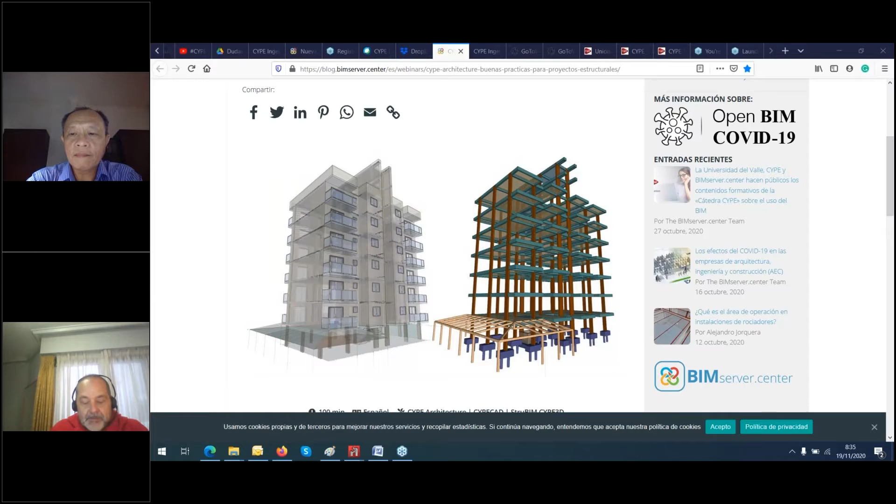And today, let me show you my screen. Good, thank you. Okay, today we are going to present the software CYPE 3D. And well, there are several programs connected with this software. So it's going to be a set of almost 3 software, but at the same time, I can explain to you step by step, slowly, about the program, how to learn the program.

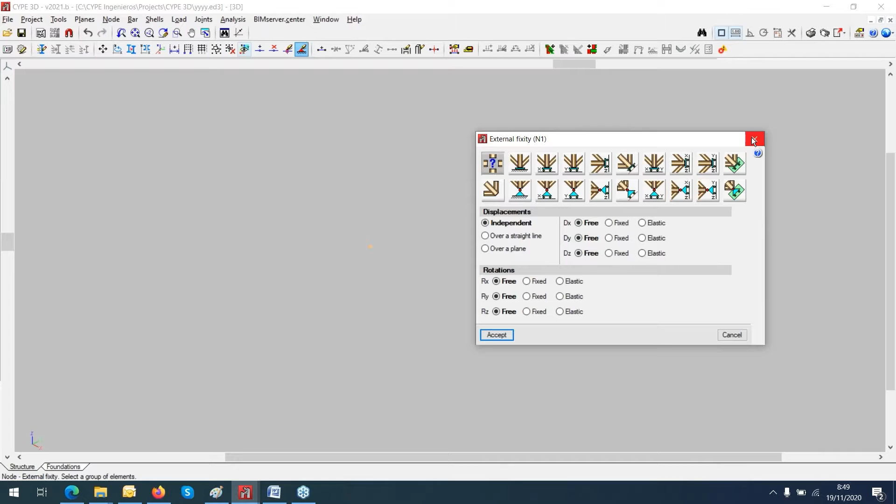So after that, you can start introducing a bar, a new one. By default, it gets this kind of bar. I'm going to show you how to choose the bars.

In this interface, we have several options regarding the materials. That one is the steel sections. The second one is the rolled steel plates, and the other one is the cold form steel. You can also work with wood, aluminum, special aluminum sections, concrete bars, or generic sections.

On the bottom, there are families. If you choose the first one, you have families on the bottom - could be this and this, etc. If you choose the second one, at the same time, you can display different sections. The same for the other ones.

So remember, if you choose, for example, to work with these special aluminum sections, once you finish the program, it will give you detailed result information according to the materials and so on.

If you are using the generic options and you want to introduce a concrete bar, these bars are not allowed to get reinforcement - you don't get the reinforcement. But if you are using the column or beam section selection, in that area you can get the reinforcements. That's why we introduced the first option about the elevation, because in that matter you have better control about the introduction of these elements.

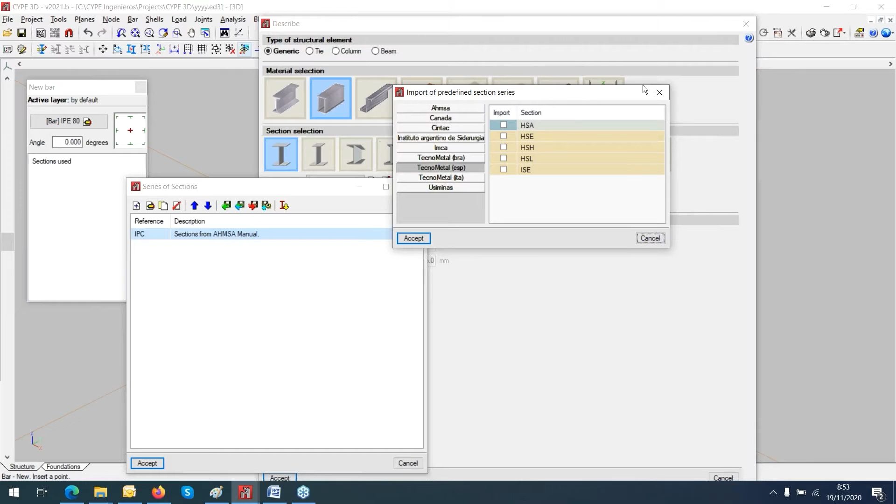Also, if locally you have some fabricators and you're interested to have this information in the software, you have to send us - you can call the company and ask for the profiles and manuals, etc., and send them to us, and we'll introduce it for the next software actualization.

All right, so I'm going to continue with this. Remember, the grid is like here, look, we have several options. Now you can use the American standard, you can use the American profiles, because perhaps you manage in your country that way. Okay, so I'm going to continue with that section, simple section.

Sorry, one second, let me see. Okay, good. Check the resistance. Well, I know something's wrong.

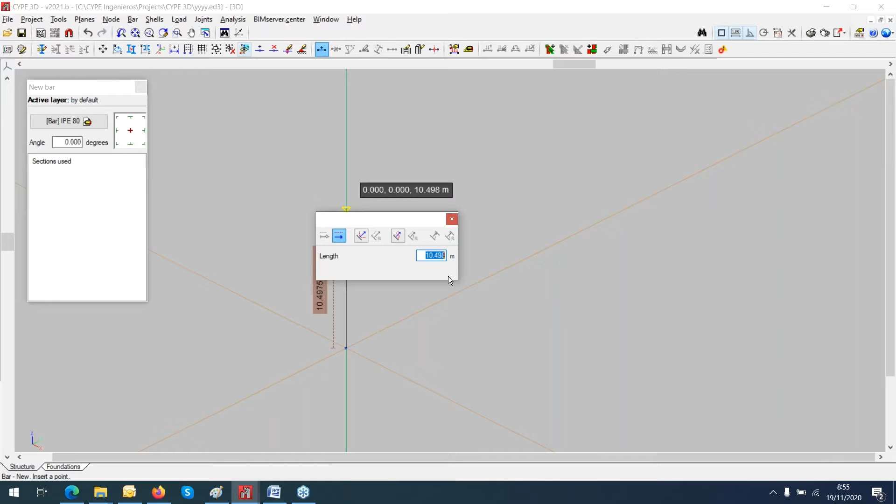Okay, so you can start from here. Remember this option, you can play with that, but you can go straight in the column using the orthogonal command. So you go straight, when you click anywhere you can introduce the height. This is the length - I'm going to do it 10, for example, and then you can go anywhere.

Sometimes, well, I prefer to work in 2D, but before going there, I will show you the basic stuff about the columns. Let me show you.

I already have these loads introduced for you. I'm going to show all of them. This is the basic knowledge about the software.

On top of the column, I'm introducing different load conditions. So we are going to see how we introduce the load first. We go for project, general data, and additional load cases. I introduce 5 live loads.

All of them are here. One's Q1, Q1 in the X direction, Q2 in the Y direction, Q3 is a moment, Q4 is a moment, and Q5 is a temperature.

There is one condition, and perhaps I'm going to use a new one, Q1. On the bottom you have different load dispositions, and this new disposition is like compatible. When you are playing chess, you have black and white. When you are using these options, it's like the loads are considered at one time with any combinations in the white sections. In another combination, they do the opposite, introducing the load in the black conditions, and so on.

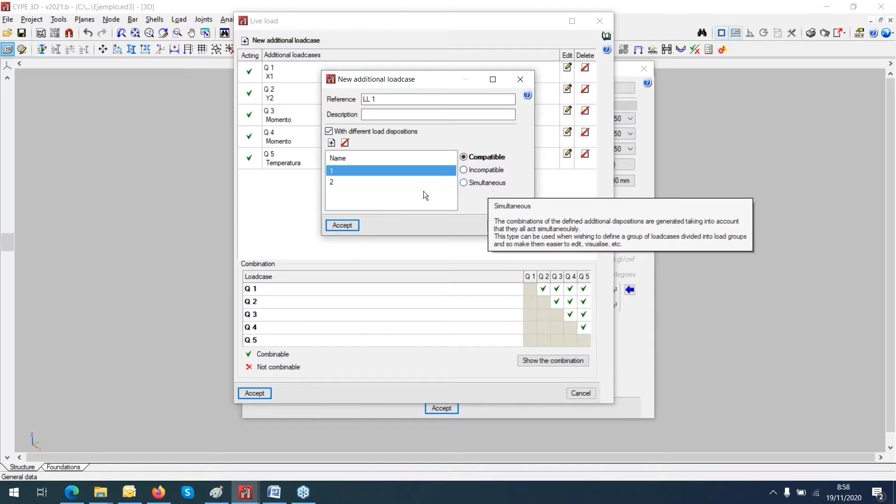And the other option is incompatible, and another is simultaneously. So, well, I'm going to cancel that. Remember, the more things you add here, the longer the program will take to do the analysis. Try to be precise, and that's all.

Okay, so we go for the conditions now, about the loads and the visibility. For example, I'm going to display not only multiple loads, just the Q1. This is the load Q1.

And now in the analysis - sorry, not this. Yeah, we can run the analysis. It's pretty simple. Now, whenever the analysis is done, I can look for the - well, first of all, I'm going to show you the conditions. Go for the Q1s.

For example, for the Q1, we go for the load conditions in the bar. So we go for this one, which is the Q4, I think so. Yeah, Q4. Q4 is a moment. The value is 4 ton meters.

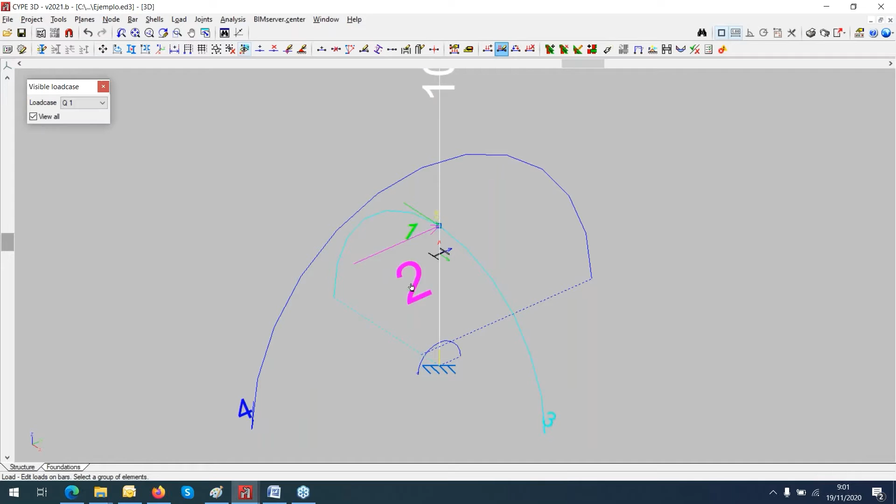But about this point, number 2, right click. The Q2 is a local point load. Relative position is about 3 meters. The global axis, I'm using this direction.

And what about the one - no, this one, let me see. That one is another point. Type of load is 1 ton. It's on top of the column, and the direction is going to be like this.

Okay, so once the analysis is done, I can go for, first of all, the check element. So if it's in green, it means that the profile that I chose is okay. This is the range that the profile is working in.

We do the first selection. I can go lower than 200. I'm using the HEB profile, but I can go lower than this one. And the ones that you are seeing on the screen in red color means it doesn't fulfill the requirements of the solicitation that we have in the bar.

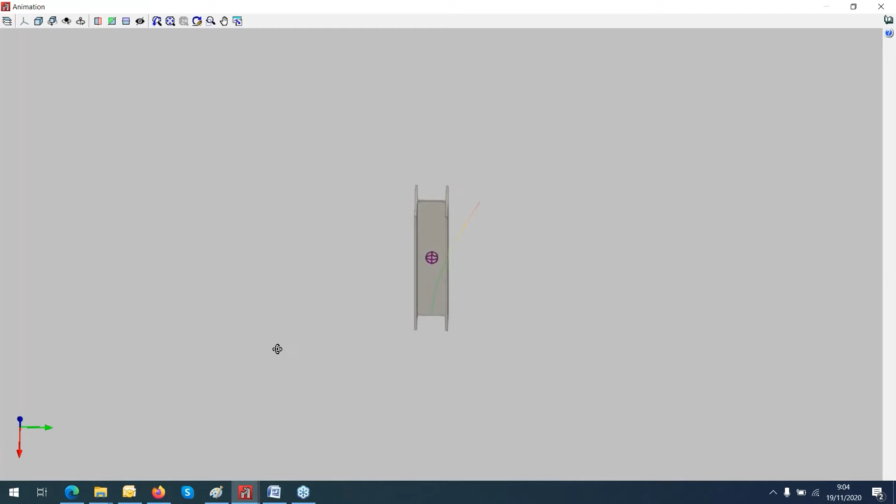So we go for Q1, Q2. Q2 is almost the same thing, almost the same. You can see it in this way, you can turn a little bit, it's another direction, so it's a very nice option to see what's going on with the structure.

That one doesn't do any effect because it's Q3, and then Q4, the same, and finally Q5, which is nothing. The temperature, which I chose, doesn't show any reaction.

You go back here through this window, in this small book over here. Click here, and you go back to the same screen. So now I'm going for another example, a very simple beam.

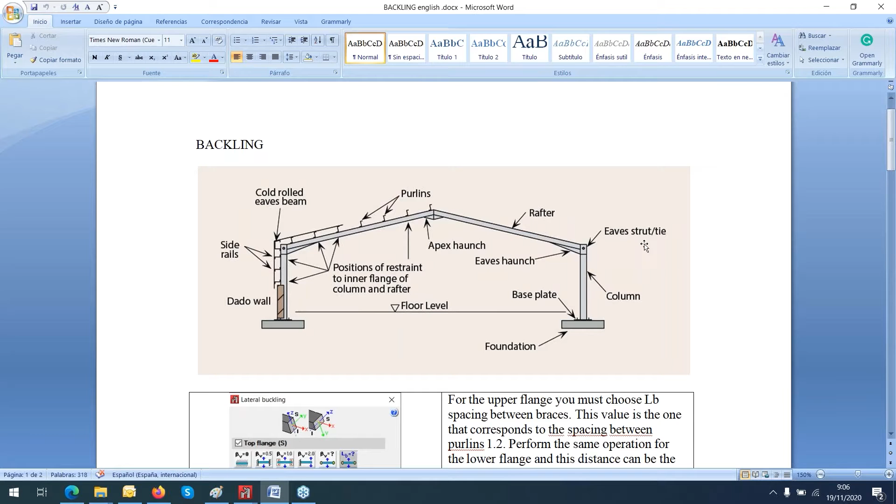One second. We're going to use purlins, and talk about the cold rolled beam. Around this side we have side rails, rafter. I'm going to change rafter for beams. Columns, I'm going to use columns. This kind of information you will get, but sometimes I'm going to use another one.

So okay, this beam, I do the same thing. I create some kind of loads, could be Q1, dead load, and self-weight. I'm going to do all of them, to view it.

So those loads create different reactions in that beam. What I mean is, for now on, we are going to talk about the reactions, or solicitations, and deformation, all the time, about the reaction in that beam.

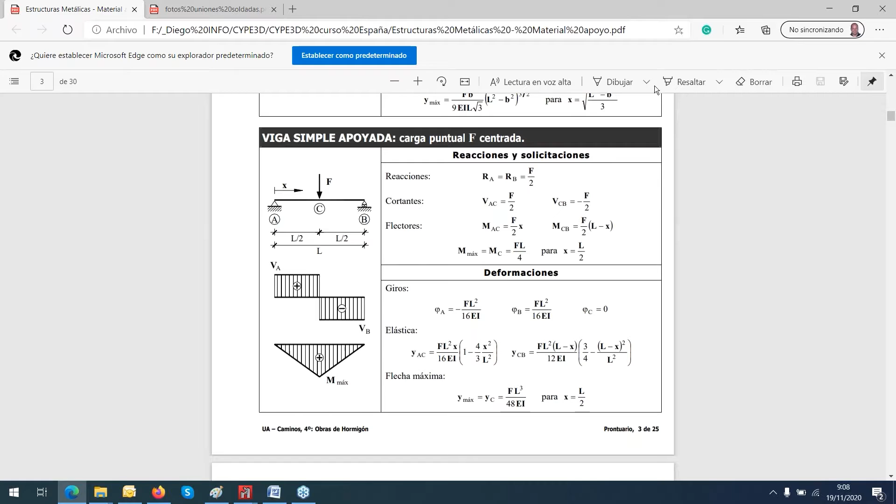Everybody knows about this kind of formulation, but I'm not going to talk about that. Just to show you about the reactions, we are going to have stress, moment, deflections, flectors, and the ones we want to have: rotation and elastic evaluations, moment deflection, maximum deflection. That's it for that, we're going to talk later about this.

Then the reactions that we are going to see in the analysis about this shape are going to be similar. So we go clear. According to that load, this beam is okay. We can go on with this, and the other extreme is going to be okay.

Remember the constraints, I'm going to show you the constraints. These are external ones, pin connections, and we have some restrictions about the displacement. Same for the other one. So at the end, we have that one free end.

This cantilever, the condition of the cantilever changed a little bit. I will show you first the analysis and the deformation shape. Okay, according to that...

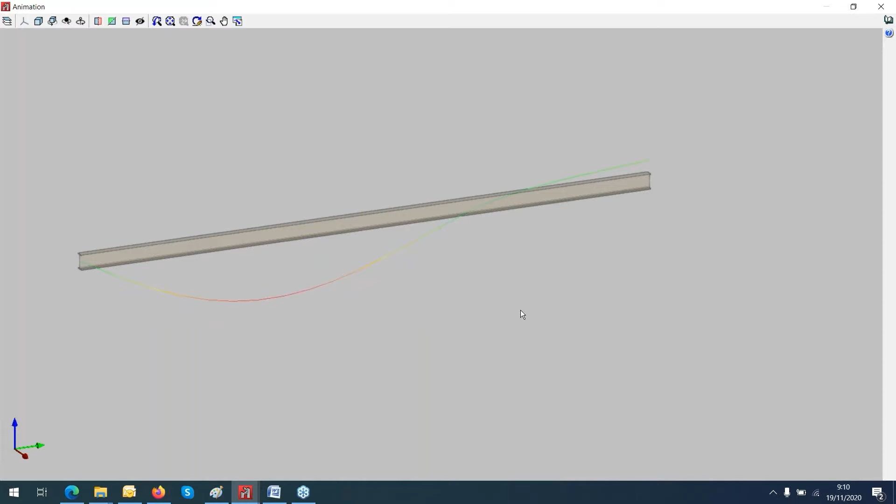Going to increase this value, maybe 300 or more, and for the dead load, look, that is what is happening, what's happening in the column, in the beam. Okay, this is the deformation shape.

Same thing for Q1. This is the normal behavior of that column or beam, but allow me to see in a better way the entire structure, how the structure is moving, and I will correct or fix something which is not well connected in the structure. So we go back to this case.

Now we are going to talk about the limit definitions, the deflections. I can create a deflection group, I have to select 2 points, and I already have this selection. But if I get a new one, the program will display something like that.

In this case, this is not the right way to do it for this scenario, because we have a cantilever on top on the right side. So in between the knots, between the articulations, we have something that we call secant, and at the end, from the second point to the free one, you will have something which is a tangent. So we have to be clear about these conditions.

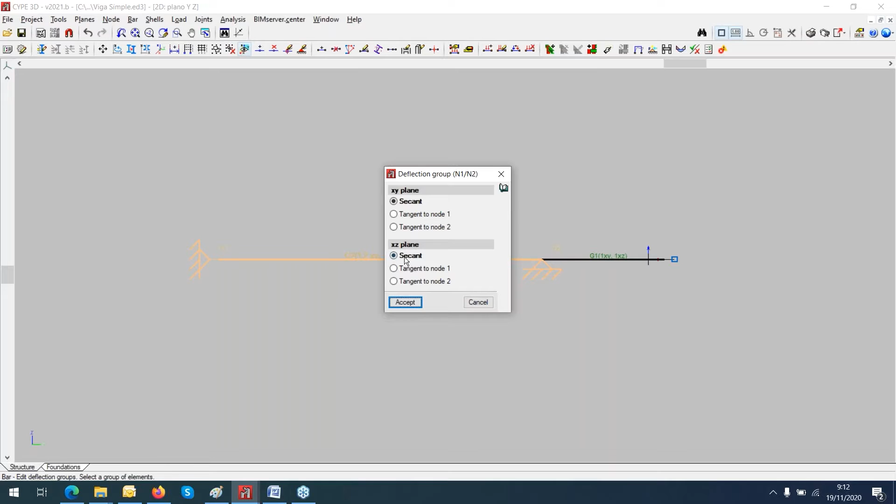I'm going to edit the group. This one is, as I told you, secant value in the X and Y plane, and in the X and Z plane are secant. It goes like this, something like that. And on the other side, the condition is tangent to knot one. But we have to have a reference from this side, because at the extreme of this bar, we have a free point.

So in order to select the tangent condition, we must have a point of reference. In this case, this point is the reference. That's why you call it N1 and N2. You don't see it right now because the color is different, but you will notice that we must change the conditions. In cantilever, it's different. Okay, this is knot N1 and knot number 2.

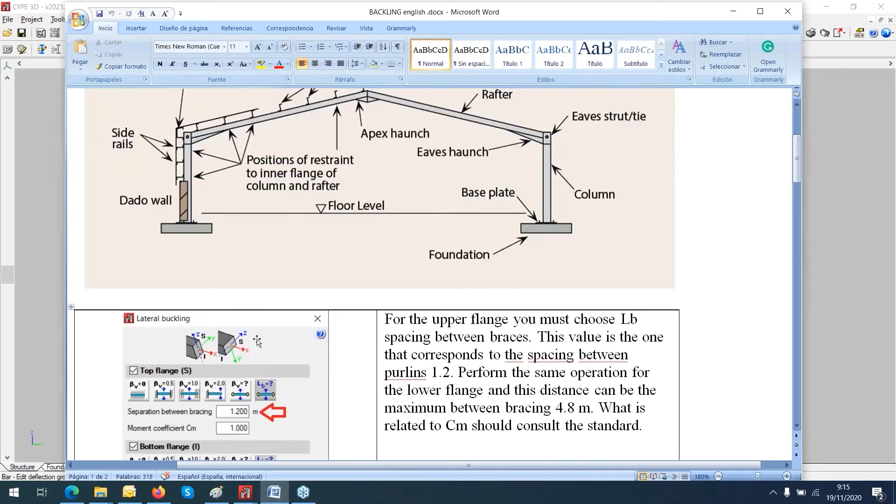According to the spacing between the straps, on top, the profile will be embedded or restricted, and in that area it is better to use on top the length of the spacing between straps. That's the right condition, because you are not going to have that buckling effect in that area. So on the bottom flange, you have to introduce the entire length of this rafter.

Suppose the rafter is 4.8 meters, so the second condition is going to be 4.8 meters. So that's all about this part. We have also several conditions, but we go on with the presentation. So continue with the lateral buckling. We go back to the selections depending on the conditions. In this case it will be something like this, like simply supported. If we go for the last one, especially on the roof of this warehouse.

Okay, and the cantilever is something similar. You have to choose the conditions. About the critical moment, I'm going to use, indeed,

allow me to do something. Let me check. Give me one moment, please. I had two screens, so I have to look for one of them. Let me see. Okay.

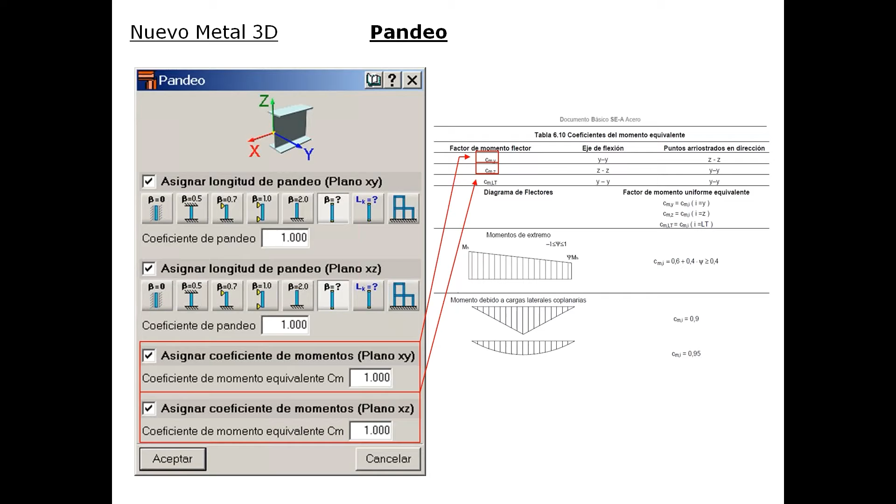Same thing for the lateral buckling. The way to do it in here is like this. The moment factors, Cm, are according to these tables. So don't worry about these factors. If you keep it 1, it's going to be safe. All right, so I think this is it for this part, and the analysis. I did the checks. Well, we can continue with the next examples.

Okay, so we go for our initial conditions, right? So I'm going to continue right now with how to work and how to introduce a warehouse in an easy way. We have several options. The ones I'm going to use are going to be easier. It's better to work with windows. I'm going to open one of them. In this case, it's going to be rectangular in that plane, orthogonal plane.

So I have to select first the vertical bar and then the side that I'm going to work. I'm going to use the Z Y plane. If you want to call it, I'm going to call it Z Y plane, or maybe frontal frame or whatever, right? So it's going to be my first one. So from now on, I'm going to continue in two screens. Let me check the bar. I'm going to continue in the menu bar.

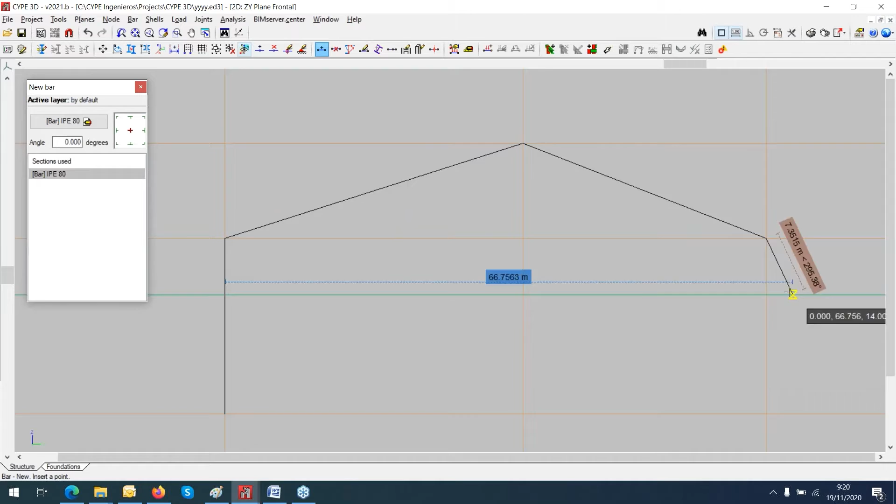So I don't really care where to click, I can do it like this. I'm gonna accept that as well. And also remember that I'm using the orthogonal commands. So I can display now everywhere. You can click everywhere. I accept that as okay. Sorry, it's okay. I'm going to go back. I did something wrong. And finally, I finish here.

Okay, so now we have a command, a very nice command, which is called tools. We go for tools, and then bar and node. We go for node. Then we go for codes. Okay, planes, dimensions.

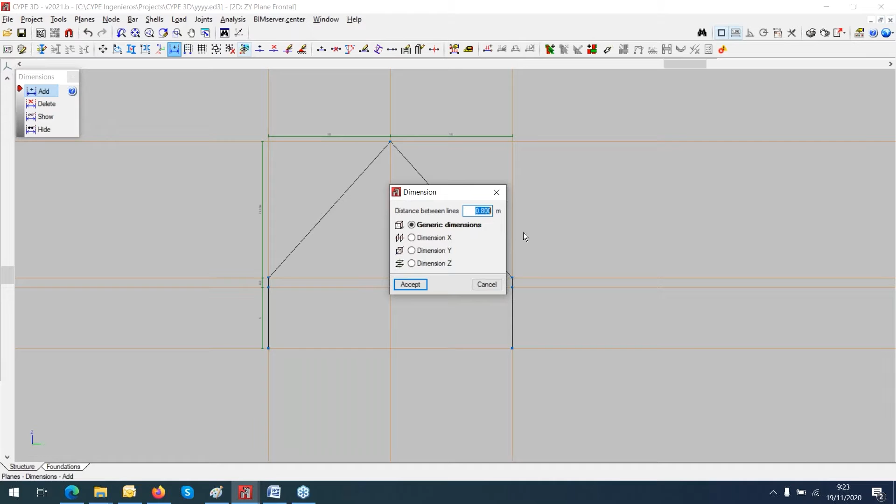Now I'm going to change that with the right click. You go back to the command. I'm going to introduce 5. 5 will be the distance between this and this. It is going to be the height of the warehouse, the first frame, and then right click 0.8, which is going to be from here to here, and the last one is going to be 1 meter. You can call here 1 meter and click on top, and then in the second one, now we get it right.

So these are the new conditions for my warehouse, and then I can start working on it. So I continue with the same bar, new one, from here up to here. Okay. And I need to use a different command right now, and this command we get through tools and generations and also planes. If you click from this point up to this point, you have, no, I'm sorry, generation: tools, generations, nodes and bars. I'm sorry, nodes and bar.

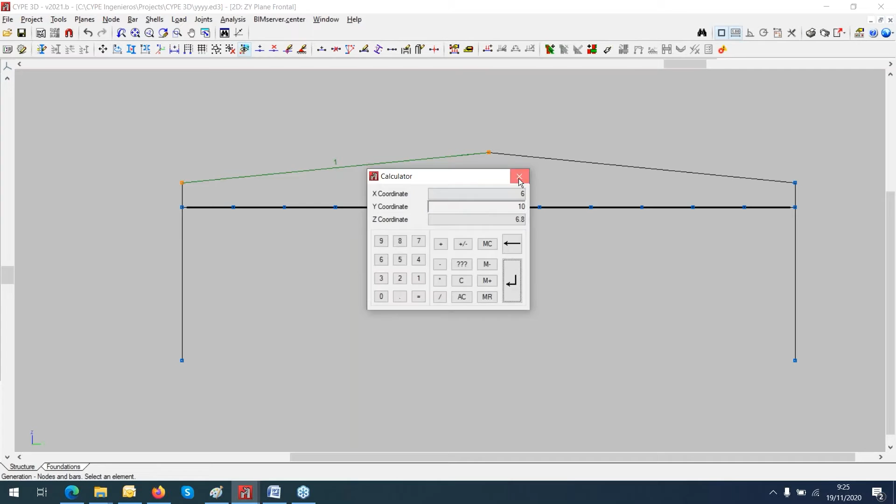Clicking the extreme and the other side, you will see number one. Click the right, click on the number. It gives the number of sections that you are going to use. In this particular case, I'm going to introduce 12 separations, and the program divides the bar in 12 sections. On top, right click. Yeah, now I'm going to introduce on top. On top is going to be something like 6. Sorry. We go back. I'm sorry. We go back to the same command.

I go for the tools, generations, nodes and bar. Click here on the other side, and then right, and the next number is gonna be 6. Like that. Continue with the same command to the extreme. Right click. It's number 6. All right. So we can continue with the same bar. By default, it displays IPE. So I'm going to go a little quickly. And then the other side.

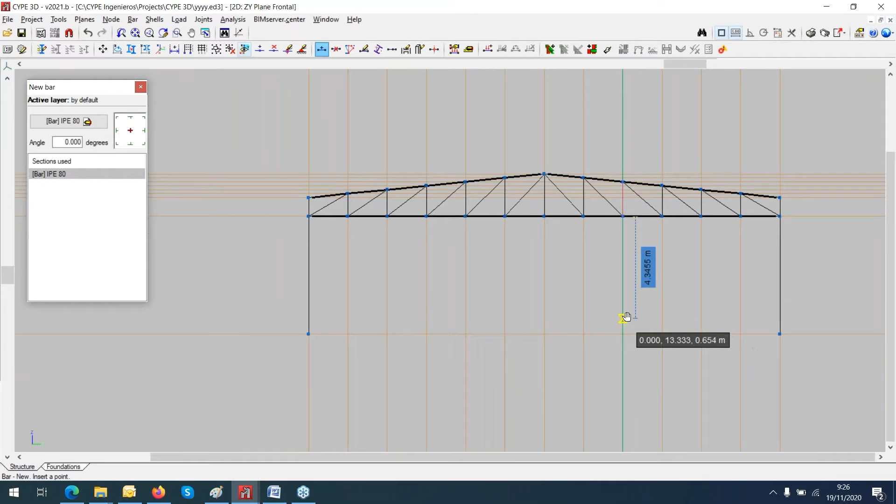You know, as we go on with the introduction, you will see different lines. Those lines are references. And if you go faster, maybe you get the wrong side because of that. So now, the next step is to use groups. In bars, we have to use group. I'm gonna group the one on top. Well, this one is gonna be different. I can select. Let me see. I can select like this. All this group.

Okay. Right click. Say yes. And now the one on the corner, because they are going to be different. And these two bars are going to work the same way. Okay. I forgot to select the external fixity on the bottom. I'm going to use the fixity. Okay.

On top, if I display that, look, internal fixity means the nodes, all nodes on top. If I display this with the right click, you can create different conditions. The ones you give some coefficients. This is free, and this one is a generic one. So we go for the first one, which is the fixed node. Okay, the program by default is going to use that.

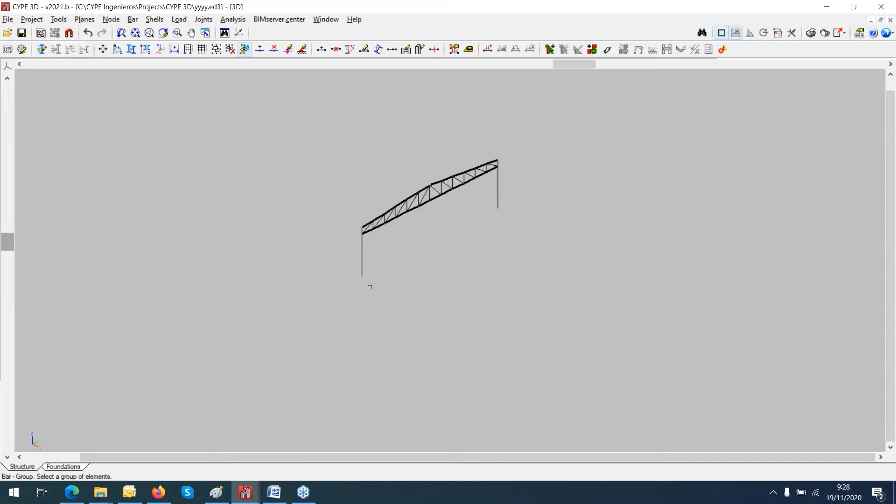So now if you go for group, if you touch it, you will display the groups. Okay. So now it's better to go back to the 3D view. Yeah, here from the 3D view, I'm going to generate the same frame at a certain distance. So you have two ways to do it. One way is to go back to the tools and use the copy commands. You're going to copy the nodes and bars.

You can select all of them like this, then click in one of the corners, right click, and then click it again, and you start moving the entire structure anywhere. Okay. If you want to be precise, use your orthogonality. You see, you control the displacement in a better way.

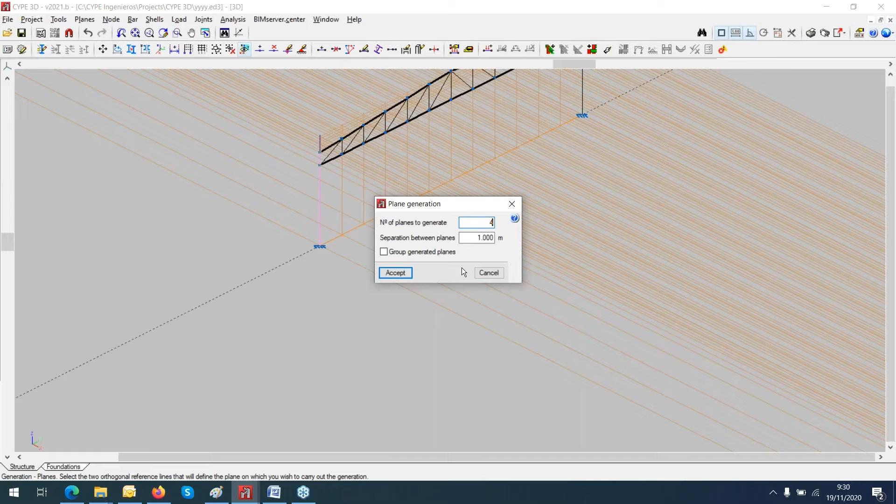Okay. Now we have another option, which we got in tools, and it's called generations and planes. Now we're going to use planes. So we click, for example, here. We click here. You have to be precise. You are clicking the wrong way. So now the number of planes to generate is going to be 4, and then the separation between them is going to be 5, and I'm not going to group them. Okay.

Oh my goodness, I did it wrong. 1 second. So I'm going to do this again. 4, and this one is going to be 5. Okay, good. Remember, you have to group them. So go for groups, always groups.

So this group, the front portico and the back portico, according to the load selections, are going to have the same results. So I prefer to select these two groups as one. These ones are going to be selected as well, and the internal ones are going to be different. Okay, so these and these and these are going to be another group. The ones on top are going to be another group.

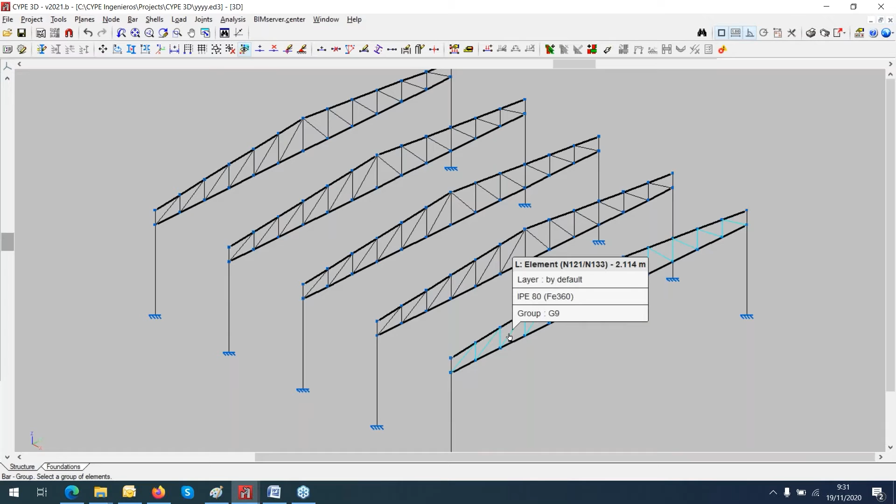What about this, that, another group? And sorry about this over here. Until we got it all, well, it's missing this one. Okay, so on the bottom, click, and the one on the bottom like this.

Maybe you're thinking why this guy is using groups. Groups are really important because suppose you have different loads on the roof. According to the location of the bars, some of them are going to require more solicitation. So as a group, the program is going to do the best selection according to the profiles that are available in the software. So that's the objective of using groups.

So we continue now with another window. We go for open a new window, the same thing, orthogonally. So we can select this point, this bar, and then the one on the bottom. Always give it a name. This is maybe the left side. Okay. We continue with the same bar. New bar.

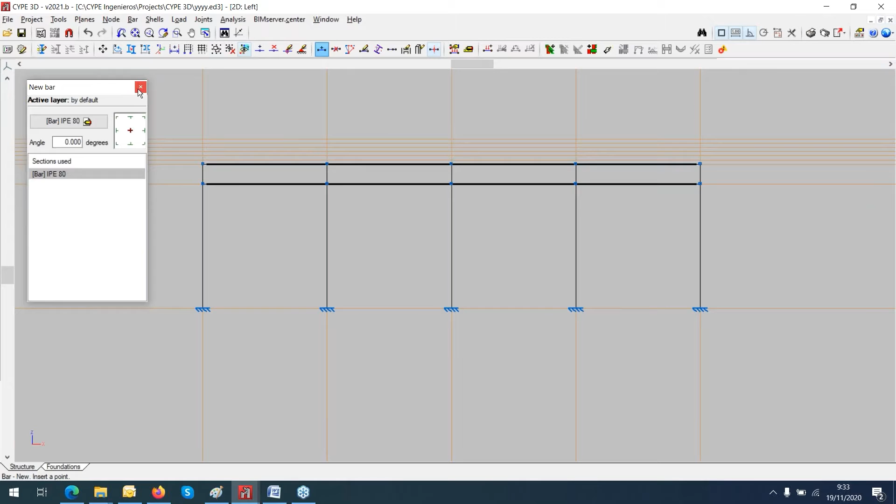So we go back to the tools commands, generations, and nodes and bars. I'm going to click here up to the end and right click, and it's going to be 16. Okay, on the bottom the same thing, 16. So now these are going to control the wind on that side.

What else? Here from the bottom, 3, just 3 nodes, and divide it in 3 spans. Okay, continue with the same bar. So wait, sorry, it's going to be like this. I'm going to make a close up from here. I'm going to navigate with the orthogonality. I already had that one.

I call this agility. Don't worry if you don't manage this the first time. If you do it 1, 2, 3 times, you will get it. I don't know if you know an expression. You say, if a fool persists in his foolishness, sometimes he becomes wise.

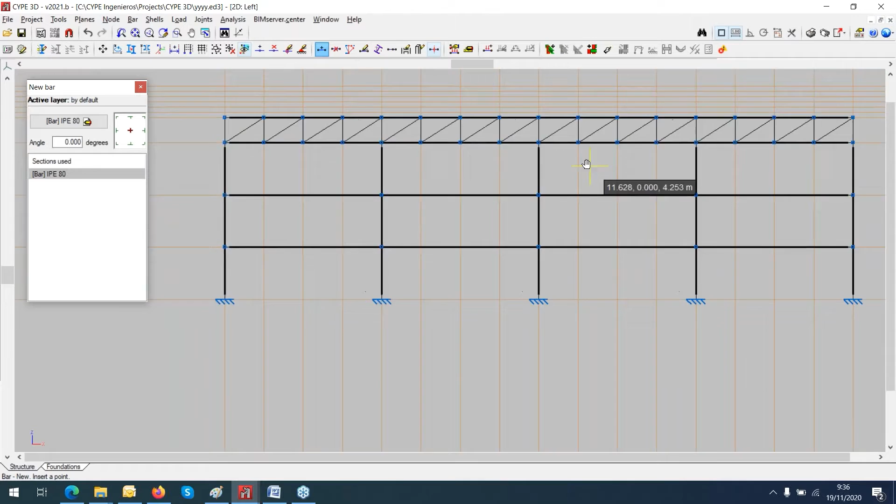All right. So another one from this side up to here. Same thing from the bottom. Okay. And I will select the groups. Remember the groups? So we go back for groups. I'm going to select, not the one at the corner, because I already had that one.

All right. So another group, the one on top. That's another group. The one in the corners already has a group. The one internally, we have a group. Those are in a group. The external in the group. So I'm going to do another one. Okay.

You will notice that there is a red color, dark color in between. That is because we are considering right now that the bar is a full bar. It was made that long from the factory. So using the bar, we can create an element. You must click in the first knot and the second consecutive knot. Say yes. You notice that it's like you have sections of that bar, the same bar. This is the right way to do it.

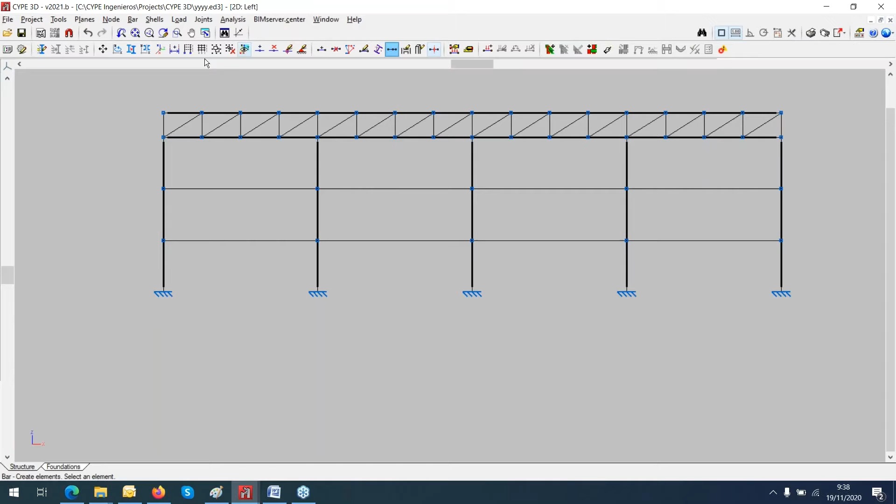All right. I'm not going to do it with the column because the columns are going to be like this. Then you can use different elements, you are going to reinforce in a different way using the different bar. We go for a new one. Okay, look at this one. I'm going to use the tie section, the tie bar, the round bar. We go for the 10 one. It doesn't really matter.

If you want to know more about the method that we are using here, you will display this document. It will tell you details about the method that we are using. This kind of bar is not allowed to work in compressed sections. It's always in tension analysis. So this is the method.

Accept that. Before starting to use this, I prefer to disable the generation of knots. I don't want to generate knots in between. So now I can go to the extremes, just to make sure that in the center I'm not going to get a knot, because this is not the right condition. But the program by itself creates a different bolt connection in here. The same for the extreme.

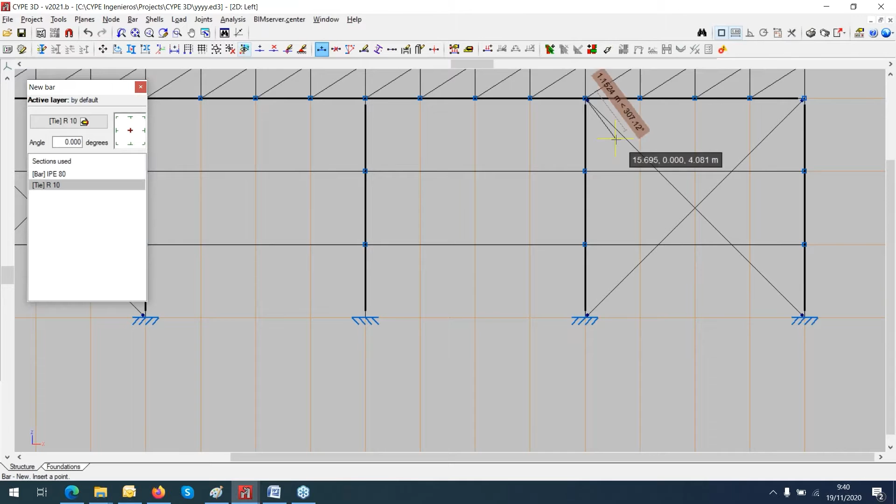Okay, so remember groups, always groups. I insist. Okay, yes. Once I divide the bar, it was unselected as a group. Okay, then it's done. So we go back to the 3D view now. And in this case, I'm going to move all these elements to the other side. So we are going to use another command, which is in planes. Groups in the plane XZ. All right, accept that.

So click here and then click one more time and then move to the other extreme. Click again, right click, say yes, and you got it. Okay. Now it's okay. Now I finished with this. I will display also the group just to make sure that it's working. Yeah, it's working. Okay. So now we go for the roof.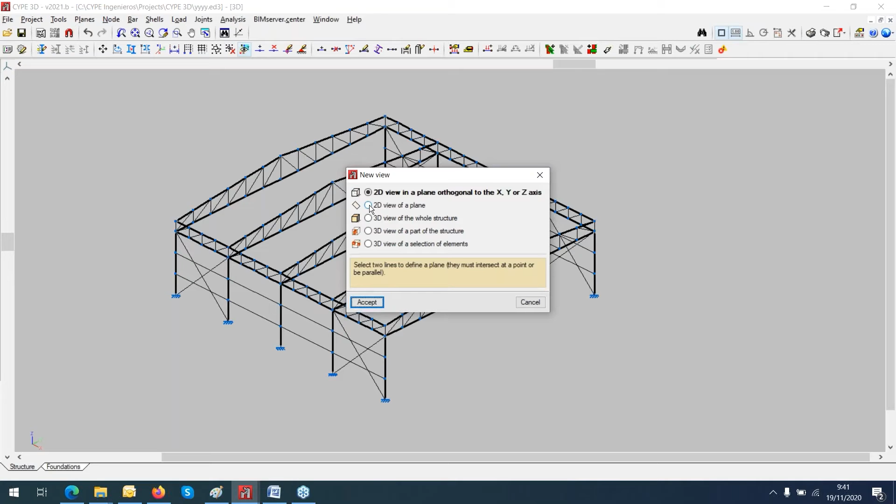Going for the roof, I must create another window. It's a new one. But in this case, you have a slope. You must go for the second choice. Well, sometimes it's better to get rid of this mess, the mesh. The way to do it is go back to node, planes. We call it show and hide planes. In this case, I'm going to hide them. Select all the points like this, right click, and it's gone.

Then we go for the windows, the 3D view, the 2D view. Select 3 points on top. Give a name. Could be, I don't know, left roof. Right. Same thing. We can continue with introducing the bars. Same bar. Well, we go for generate the knots. Don't forget that. See all of them. I'm doing the straps. Already know that the straps are going to be located on top.

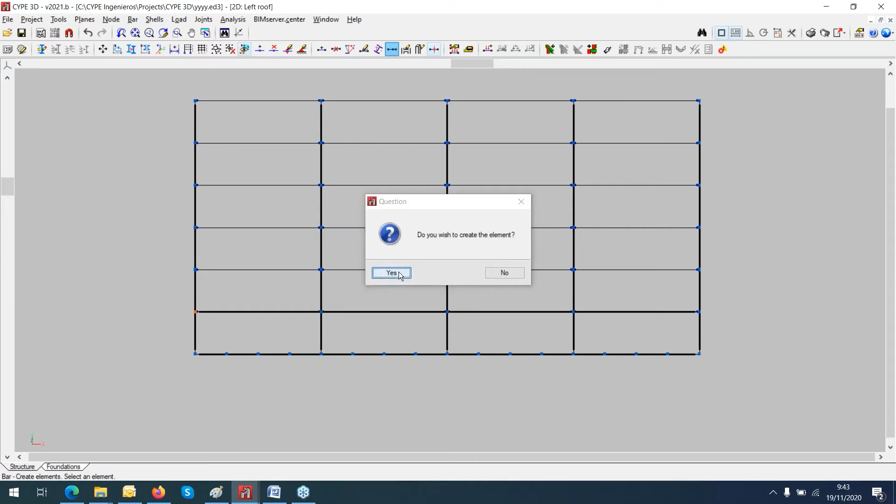And okay, that's okay. Now I can use the, sorry, create elements. Also create elements here. Two consecutive points. Right. Don't forget to use the group commands. The last one, I'm gonna keep it for a different group. I'll show you how. Like this, individually, right?

Now we go for the same selections. We continue with this one. You can come back here, or maybe you can use the bottom. If you click on the bottom, you have two selections: the IPE 80 and the 10 diameter. So remember to select the generated knot. So we go from here up to here.

All right, I'm doing okay. On the other side, the same thing. Okay, good. Group, remember? Group.

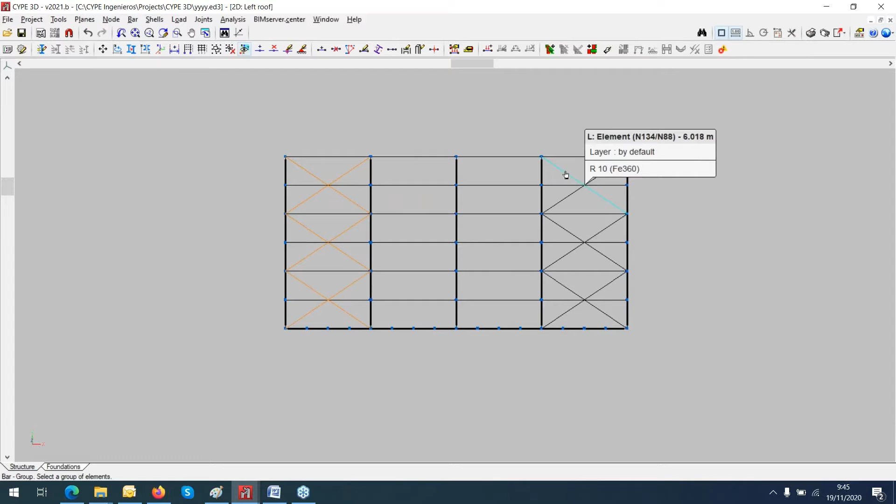Right side, yes. Okay, now we have to make sure that everything is going to be in the right place, where the straps are, for example. This view is called active view because it's only part of the structure. So we go for the active view, and

look, I made a mistake. I was introducing... Well, I have to change the bar. I'm going to describe this group, which is the wrong one. I'm going to use the IPE 80. Okay. Now you see, the 3D view helped you a lot. I was making some mistakes, but I'm using it, okay.

So now the straps have to be on top. And also the straps are not well located. They have a different slope. So I must correct that. In order to do so, we must go for the bar, which is called describe this position. So we go for the group, select the group. All right, right click.

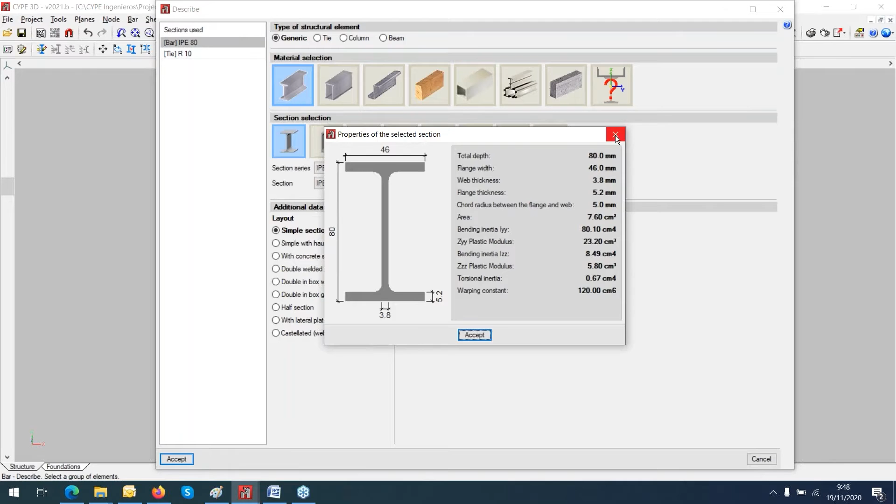And we go back to the 3D view in the active. So now it's missing a little more, it's almost in the middle. So I need to go a little farther. First of all, I need to know the right dimensions of that bar. Okay, here. So it's going to be 80. So half is going to be 40. So we go for the bar description, describe this position.

Right click. And now we go for the 40 millimeters, 40. Could be globally or locally. Okay, I'm using locally. If I click enter, the last check, look, that's the right position. The straps,

look, in this case, the purlins, or you call them straps, if you are using the portal frame generator, it gives you exactly the right purlins and also the best separation of these purlins. In my examples, I already had it, but the right way to do it is like this. Once you are inside 3D, it's up to you to introduce that one. If not, it's not important. You need to introduce it because you want to show the clients some details about the job, about the work, right? Okay, so continue with the other side.

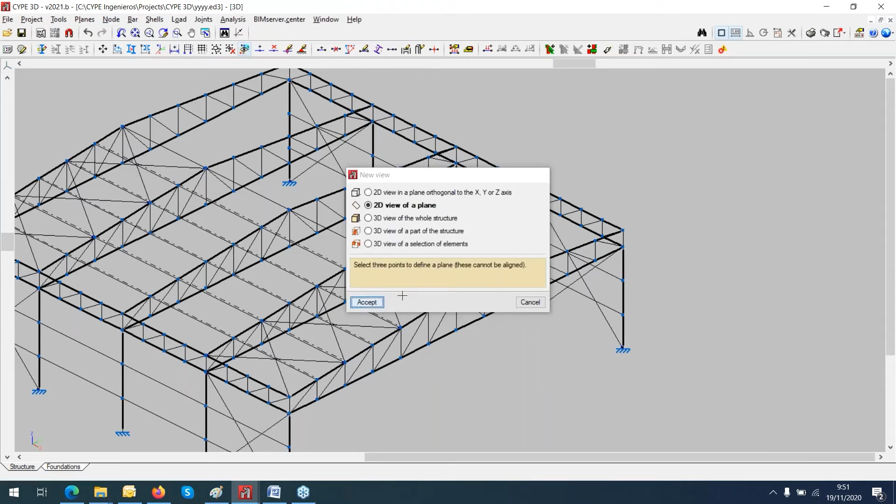We go for the 3D view. I'm going to introduce the last one, analysis of the window. Open a new one, select 3 points. Sorry, I did it wrong. I'm gonna cancel because I did it wrong. This is the right side, right roof. We do the same. 80.

Purlins are really hard to do right. It's gonna be a little difficult, but with this program, it's gonna be easier. A bar, create an element, 2 consecutive points. Can you just copy that one, Diego? To copy, well, on the left, right, direct. No, if I copy, it doesn't copy. Oh well, yeah, could be a solution. Okay, it's done.

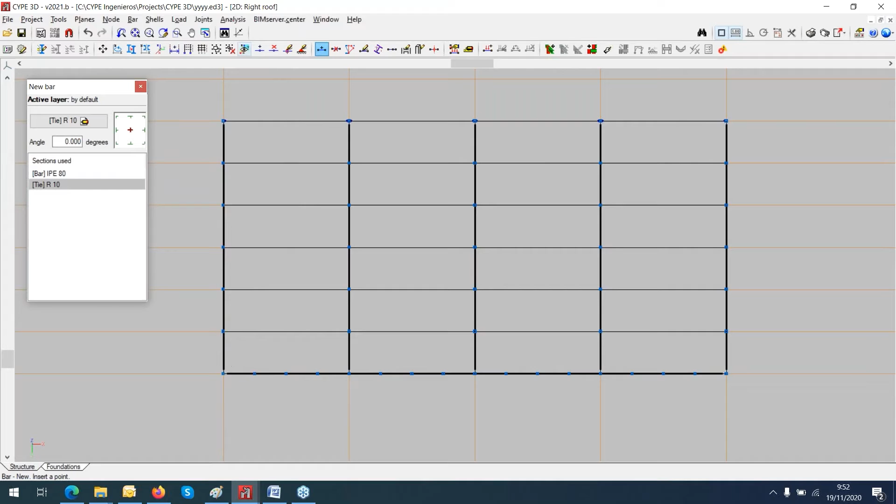Bar group. Okay. Okay. The last one. Remember, that's okay now. You see, the copy command would be a nice option as well. Everybody can find a better solution, better results. This is my option. This is one option.

To teach this software, you must concentrate and repeat the same actions all the time until people get it. It's gonna be boring sometimes, but that's the only way to learn. Practice makes you perfect, no?

Okay, good. The last check, I'm going to turn it: bars, describe the position. I already know the right position, so it's going to be faster. So we turn it, we put it on the bottom. It's going to be 40 millimeters. Oh no. In this case, it's going to be minus 40. We'll see. Trial and error. We have to check our job. Okay, good.

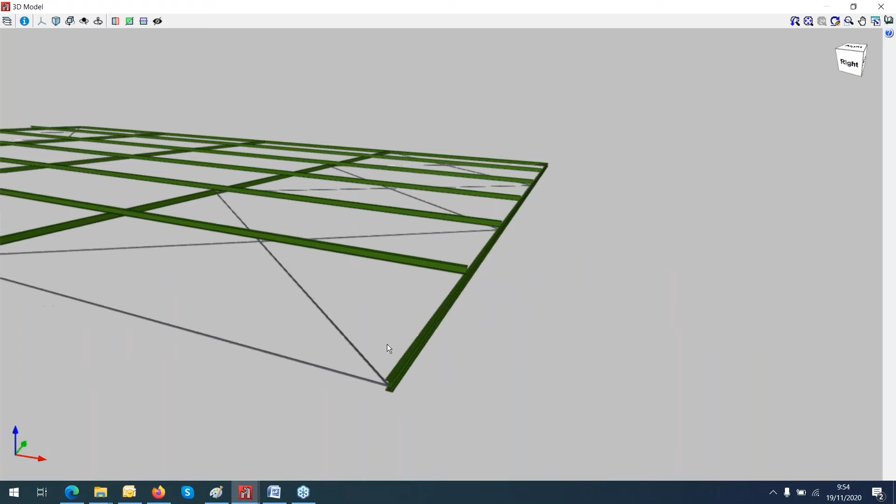There is something wrong here on top. I have to change that bar, the one on top, and I'm going to do it like this. Describe, and then right click. And I'm going to choose the IPE 80. One more time. Okay, good. I can put it on top as well. Okay.

Diego, yeah, tell me. Can we make the intersection on the very outermost of the bar with the purlins, not at the center, to lay it right at the end of the flange? Sure. Yeah, sure. You're right. Let me finish with this. Like this, and 40. I guess 40. Minus 40, I think so. Minus 40.

All right, it's okay. Well, perhaps it's not like this. It's okay, I need it straight because it's the last one.

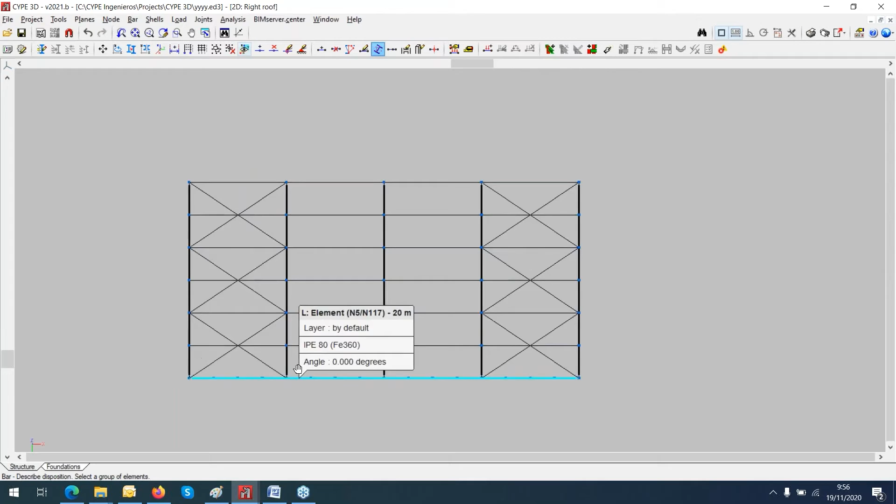Vale, okay, got it. Sorry, what are you saying? I forgot that, say again. The outer purlins, you know, when they meet at the outer bar, the outer bar has to be right at the edge. Now you are at the center.

Okay, yeah, that one, no? Yeah, this one. How to make it to the center and to the edge. Okay, but this is gonna be the same. Like this, the bar. Describe this position.

We can do it like this, for example. Try an arrow to turn this side. Go back to the active window.

Well, I did it the wrong side. We go back to the plane. Sorry, describe this position, so it's going to be on the other side.

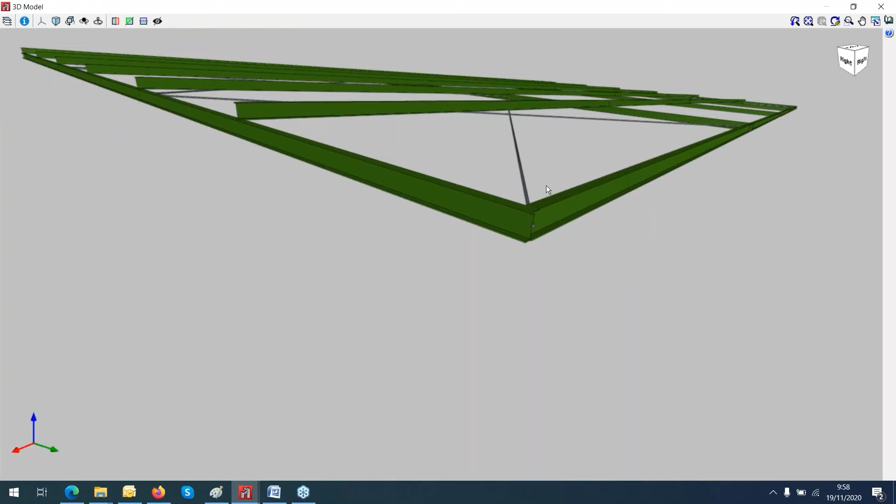Oops, sorry. Okay, good. Okay, now it's at the edge. Sorry, okay, you got it. It's at the edge. If you want to put it on top, just move it, okay? You can do it on top.

Let me see, let's try this position. Sorry, bar, let's try this position. On top, it's gonna be like this, and maybe 40, minus 40. I'm sorry, 40.

I get mixed up, you know. Minus 40. All right.

Okay, good, now it's in the right position. Then we go back to the 3D view. Now, up to now, we have to group again. This is the last one, we must select everything on top.

Now we have to check if everything is okay according to our selections. The group, see, group on top. Well, I can join this and this together.

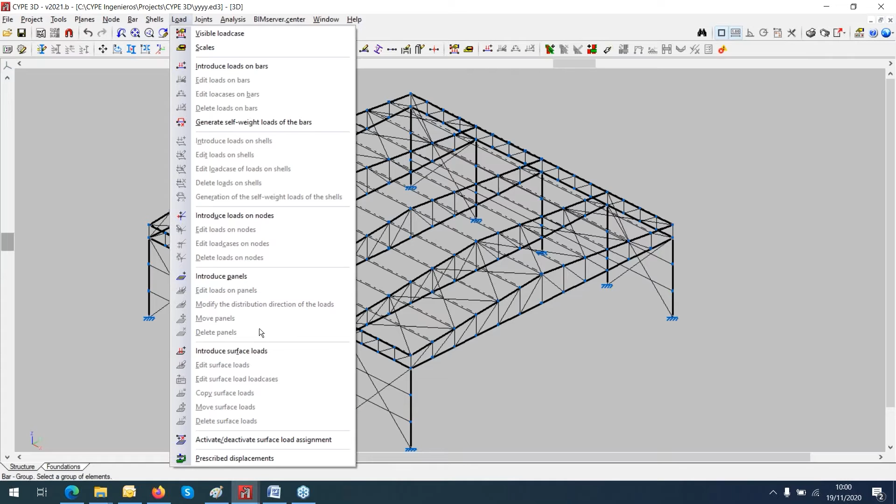The panel, you must go for 4 points. For example, I'm going to do it on top, 4 points. With the last point, right click, the program is going to select to finish the frame.

Then you must decide which bars are going to be loaded. So in my opinion, I'm going to select these sides. Right click, look, any loads coming from top are going

to be located in this direction. So the bars who are going to be loaded are going to be these ones, this one, that one, that one, that one, that one. This is my case, no?

This is my case. So from now on, I can introduce different kinds of loads. If in this case I only have the self weight, but I can do it as much as I want.

If I'm talking about the wind conditions, I will create my conditions. If I'm using the portal frame generator, this will be displayed by default. Everything will be free for you.

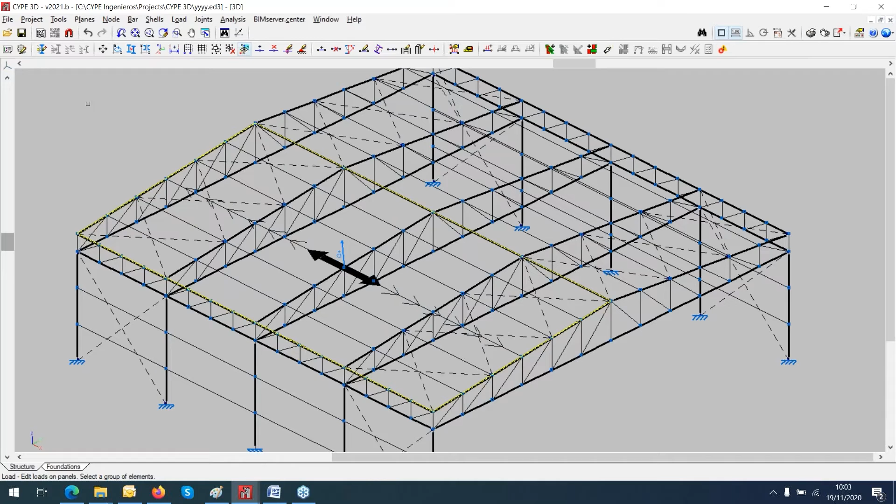There are also kinds of combinations that we must take into account. Introduce this. No, here, sorry, the limit state. The limit state.

Suppose the program by itself got inside the right combinations according to code selections. But if you want to do something external, maybe you are going to do some specific studies in the foundation, and you want to know something there, or maybe in the metallic structure.

So we go for configurations done by you, not in the concrete. It could be, for example, cold form steel. Go for default, this is the information that we got, you know.

But you need something specific, something important. So we go for the project options, click the blue arrow and accept it. You will have the combinations that are already done in the software, but it's up to you to study and select or create your own combinations.

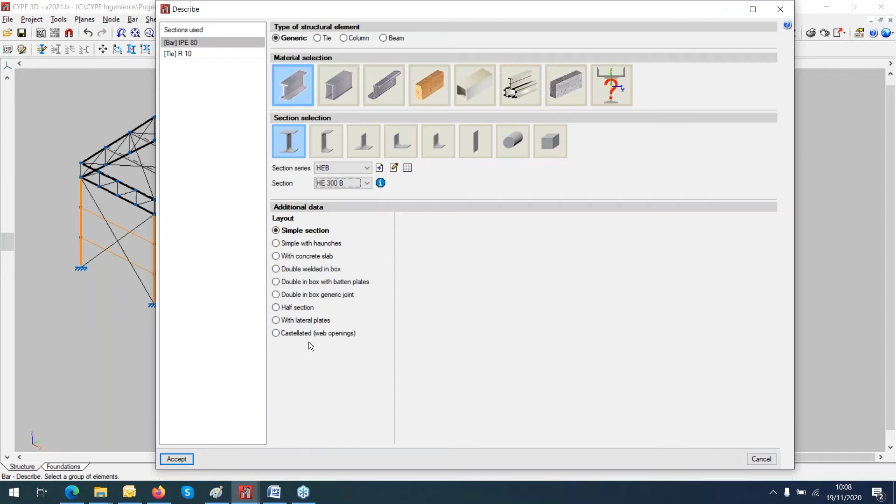So I'm going to display in 3D view the entire structure - you see, it's going to be something like that. But I use the first for the example - I introduce only one bar, maybe just 2 bars.

But you must understand that once you have the group and you finish the structure, then you can start introducing your profiles. You can start working with the profiles and then run the analysis, then start changing or making modifications until you get the best solution.

One of the best solutions means that you might know exactly about the buckling condition. Buckling and lateral buckling are essential - it's crucial for you to know how to use it, because if you need to save money in your construction, it's recommendable to use it properly, because you get the best profile. That's one thing.

Another thing - let me check if I have here. Okay, buckling is so interesting to know - you will have something like this. Maybe you have a strap here, you need some reinforcements in this size in the column. You have different kinds of mistakes that you may avoid if you don't do the proper solutions.

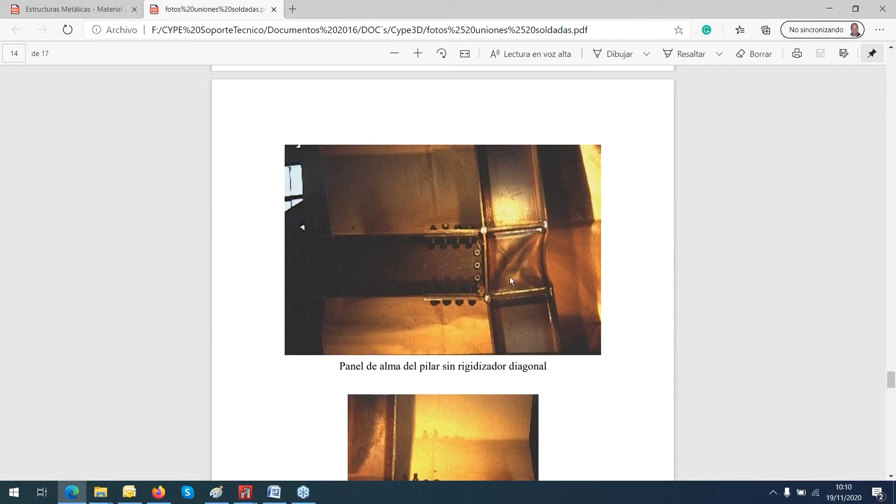You see, you have a lot of conditions. This one, the reinforcement here works okay for this beam but not for the column. Yeah, and they forgot to use here another restriction area. You see, there are several cases, several ones.

We must understand that in metallic structures, controlling the buckling is so essential. Well, they have different conditions. Some of these pictures I took here in Spain. Okay.

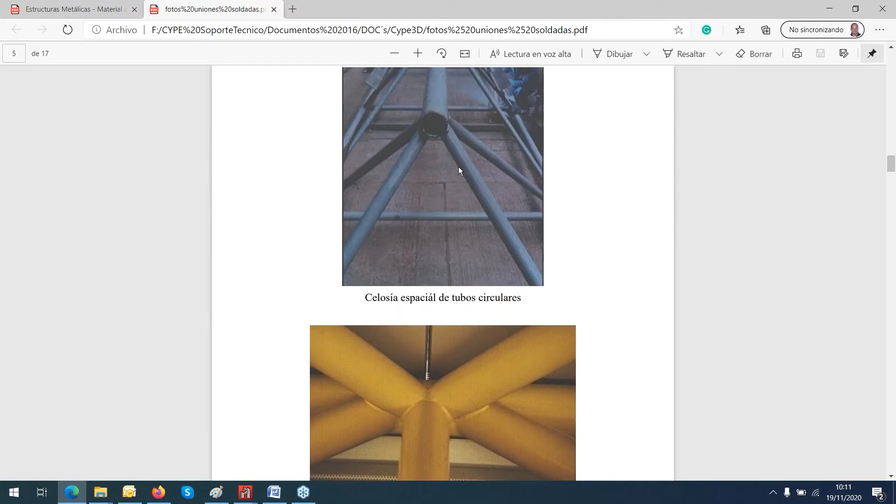We have this in the program - this solution, we have it in the program. So the program can provide all the detail of the connection, correct? Sure. Oh no, I will tell you later - we go back for that.

So now I'm going to display for you - I'm going to close this. I'm going to show you examples, because I want to make sure you understand the wind conditions, which are more important in metallic structure. I'm going to go for the aluminum. Where's our example? I think it's this one.

Okay, good. Look, in this loading, first of all I need to go for the project - here we have the additional load cases. When we are talking about wind, for this example we have 5 conditions. We have 2 in condition A - A positive and A negative, B positive and B negative - one in the front, and perhaps one for snow. But at least in this condition, wind conditions, we have 5.

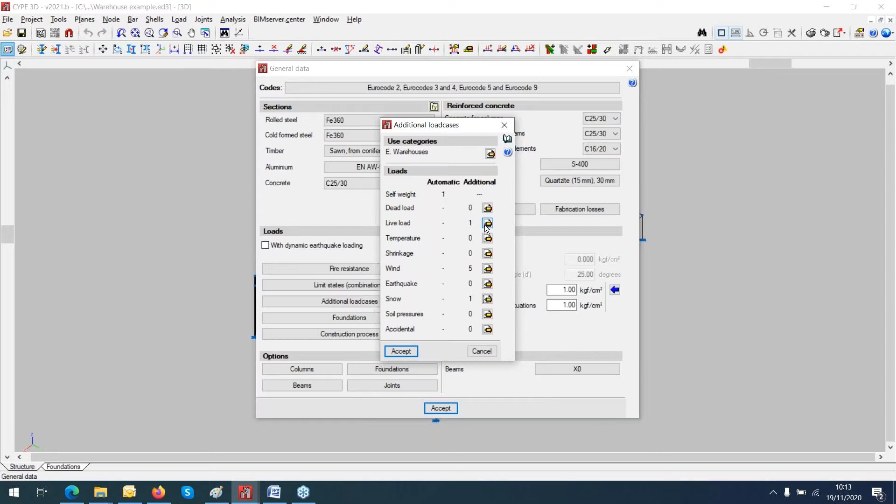Could be the snow. No, here the snow is like this one. The snow is this one. Live load could be for reparation or fixing problems on top of the roof. But these are the conditions.

Now I'm going to show you one by one. The load case conditions in CYPE 3D are not automatic. If you use the general frame generator that I'm going to use now, later the wind conditions are automatic. So we go first for the negative one. The negative one is like this.

The user did it manually. There is something wrong in this one. Maybe it's particular, maybe it's concrete. Now I'll show you the next one: positive one.

Different colors to distinguish between one another, and also the direction, you will notice here. It's coming from left to right.

Even inside the structure, the air goes differently and affects the structure differently. If the wind is coming this way, for sure it will affect differently this side of the roof or the other one.

We go now for the snow one, which is the easy one. This is the snow condition and the front condition, visible. The front one. You see, it's different.

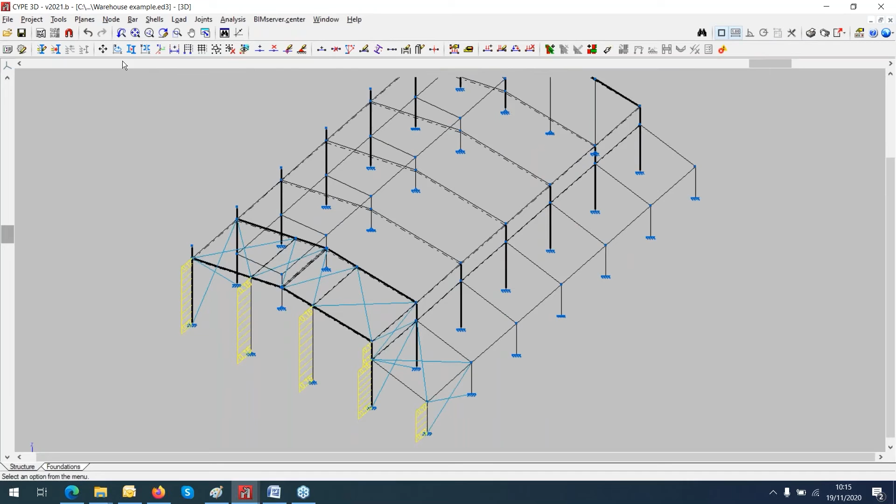Now, another thing: if you want to run the dynamic force, you must check the connections. Everything around the structure has to be well connected. Could be this section, this selection, for example, the bar, the node, the external fixity. This condition has to be in all the bars around the warehouse.

In this case, we have a different condition here. Look, so I must change this condition to the fixed one, because in the analysis the program will warn you that we have a mechanism, meaning that at that point you are liberated in the 3 degrees of freedom, and the program will not solve the structure. Inside the structure you can have that condition, but externally, like a frame, it has to be fixed. So you were talking about the joints.

So I'm going to do the analysis of this building, this warehouse. Sorry, won't be long, this is a very small chart. Remember, the analysis is done. I'm not going to go for the check and forces.

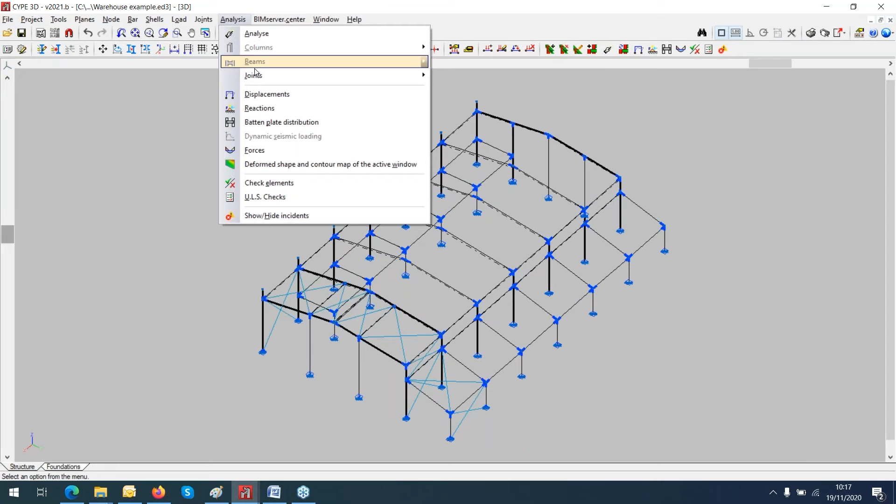We go for the joints. We are going to generate the joints. So the program recognized 180 connections. So they are there in blue. And now we go for the analysis and design of all of them.

Well, you can do welded connections or bolted connections. Now we go for bolted, but before that, at the bottom you have available the source of these libraries. I'm going to display the first one. They just go straight to our website. In our website you can go down.

You will see the connection that we already have. Be sure, or make sure, that the conditions are the same as you are recreating in the warehouse. So the solution here is a drawing. You can see it is a match with the structure.

For sure you will have the solution. Sometimes part of the node will be welded, another one could be bolted or welded. It's not necessary to have the same condition everywhere. So the joint is going to be like this.

Also in columns you have several steps in the structure. If you want to solve this particular joint, the top of the column has to be considered as... forgot the name, let me check... a continuous beam supported by columns. This connection has to be different. I will show you, okay, I will show you later.

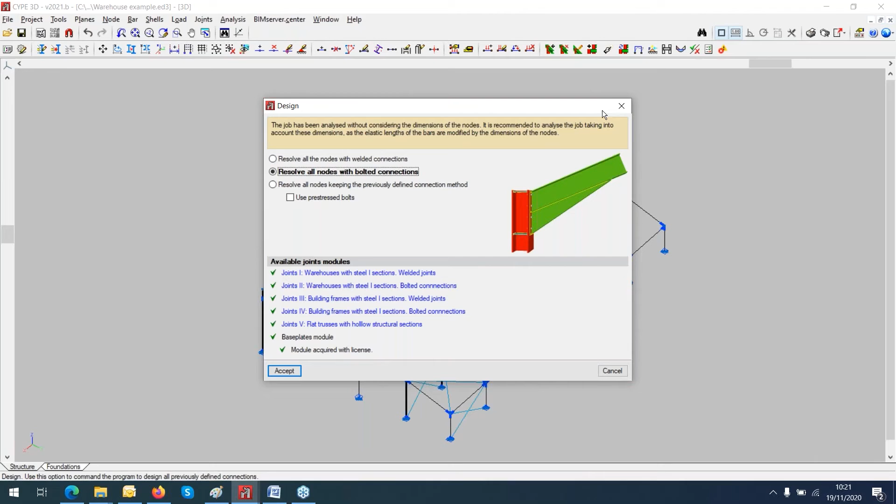Okay, so I'm going to do the bolted connections.

Okay, 1 second. Okay, when I remove this to the side, all right. So we have everything in green, which means that the joints are well done. I'm going to see just one of them. Edit, for example, that group. This is the solution.

Sometimes when you start working with the software, the column, the wings of that column are not perfect. It maybe doesn't match with the beams that are getting inside. So you must upgrade the column. You must select different profiles. The same for this part. You see.

On the bottom, if everything is okay, a green color will be displayed, which means that you don't have any mistakes in that joint. In order to get the better solution, you must get inside here, click inside, try to work on it. I recommend you to work first with these examples, and then you can start displaying information regarding those bolted connections.

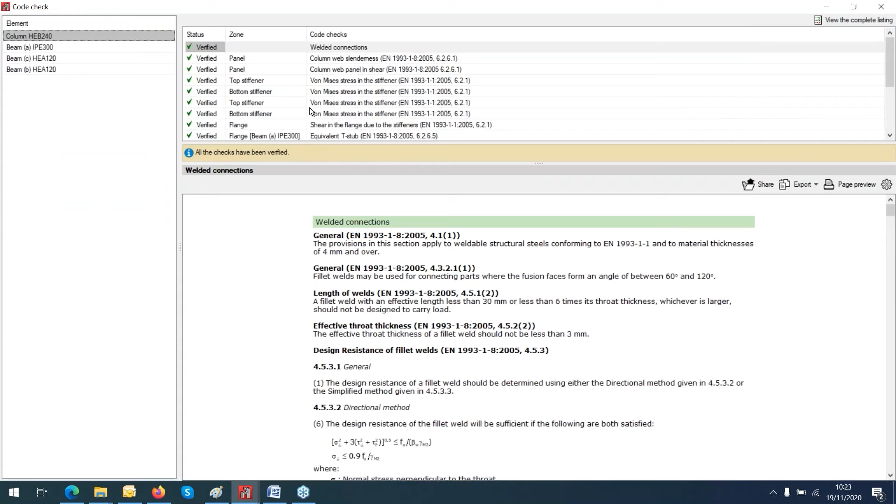And the beams that are getting inside the node, you will have very good documentation about these joints. Also, you have a full report, well displayed. You can use it. You can customize also this kind of documentation. This is not a black box, you know. This is the beauty part of this software, because you can get a lot of information for you. You can support your analysis and designs.

And it goes by the normative that you are working with. If I'm going to the ACI, it will display here the same sections with that normative. If everything is okay, you can use this block. You can close it and save your job. Sometimes we forget to do that, and we start new calculations, a new analysis, and you lose your job. You have to do this sometimes, you know.

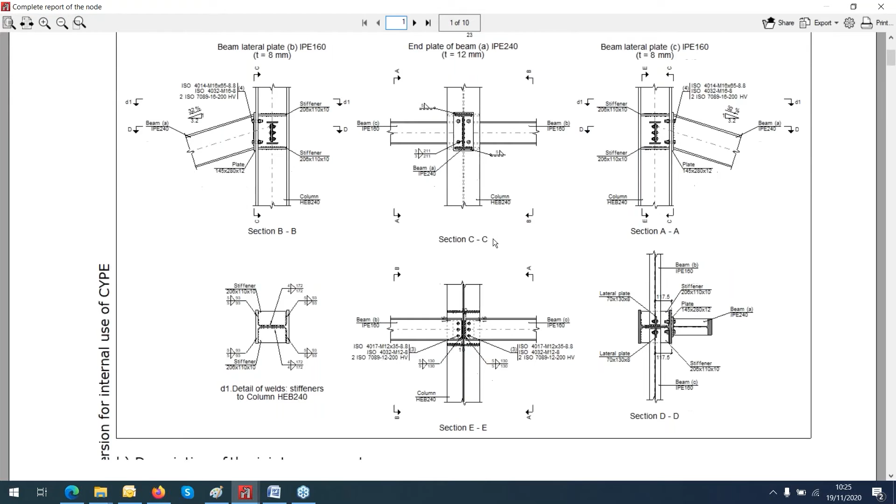I'm going to show you another one. Look, this is different. Same thing. You can get the drawings as well. The drawings are pretty cool, as you can see, well detailed. You can see sections in the groove. This joint you can see in four elements, and also the fastener elements that are displayed there.

Let me finish. We go back to one on top, on the roof. It's like this. Same theme, same drawings. These drawings you can export to AutoCAD and do the modifications that you require. Maybe that one is different. Look, it's a different one. And let me see if I have this.

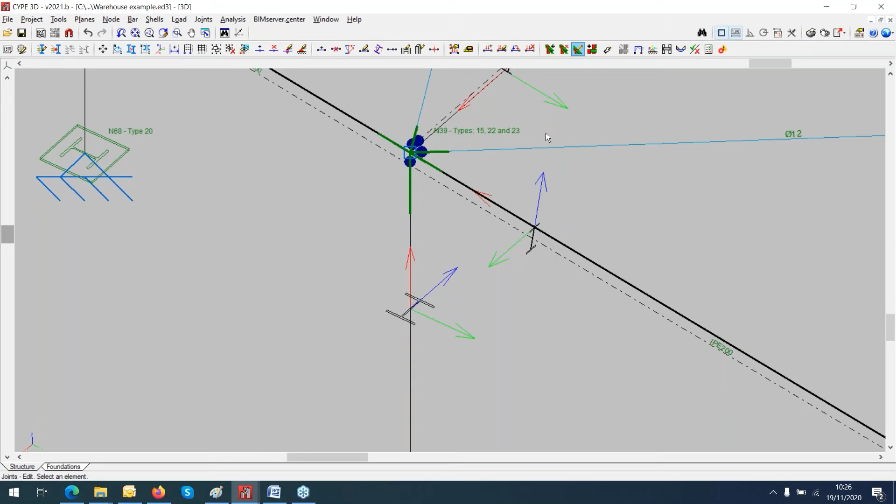Oh yeah. What I was trying to tell you before, and I couldn't find the right word, is this condition: pin end. The columns have a pin end on top, and that's why it's the only solution. If you check the joint, it will tell you that you need that condition. Let me see. Let me go back to, well, you can use this to go back. I know there are different joints.

Oh, here. Here we have everything in red, which means that we have no solution. So there are some mistakes over here, and we work it out. Fine, not this one, I think. Well, this one is okay, but I clicked in the wrong place. That one. Oh, that's okay, this is the wrong side. You will see that these elements are inside the connection, inside the plate. They're supposed to have a different slope. We must work, and you will see on the left side at the bottom that they are displaying the mistake that we must work on and try to make the solution.

Let me show you one which is solved. For example, that one. Look, this is the right place, the right situation of that connection. Okay. The other one was a little bit inside the plate. This program is really picky. If you don't do it properly, they don't give you the green color.

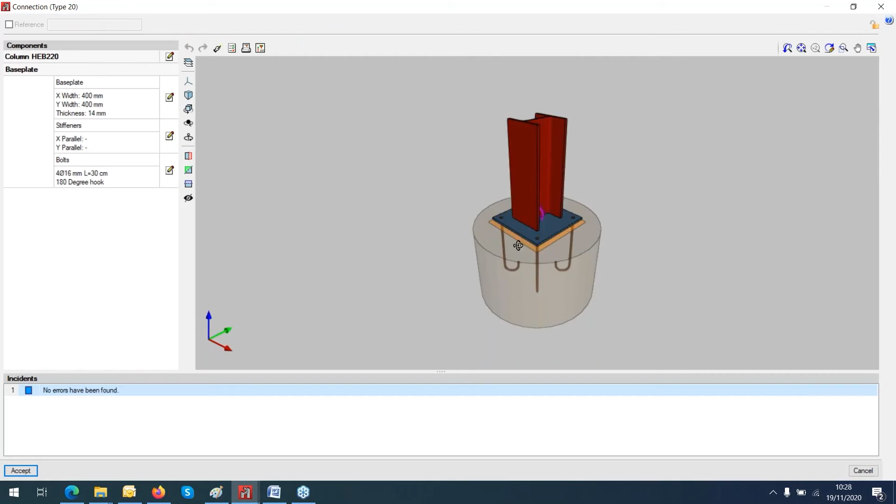Also the plates, I want to show you the plates. And you can work on the plates. You can change the connection on top. You can do it welded, or you can do it with a screw. You can change straight bars. And the bolts on top, you can change as well. You can change the plate, the size of the plate. You can create also some stiffeners around the bar. See, it's really easy to work with. It's not very complicated to learn and work with the software.

Let me show you the last one. I think that one, but it's okay. There's the knot, which interests me the most, which is like this. Extra information regarding how to articulate the knot, you know, the end of the bar. We have it especially for these solutions, which are the bolted connections.

The articulation knot could be assimilated to the case in which the end embedment and rotational stiffness are used. Is it different from articulating an end in which the 3 degrees of freedom of rotation are released? We talked about that in the beginning, but when we define the embedment coefficients on the rotational stiffness, it only acts on 2 degrees of freedom. The third one, which is the rotation on the axis of the bar, is being prevented. That means that the rotation around the guideline is prevented.

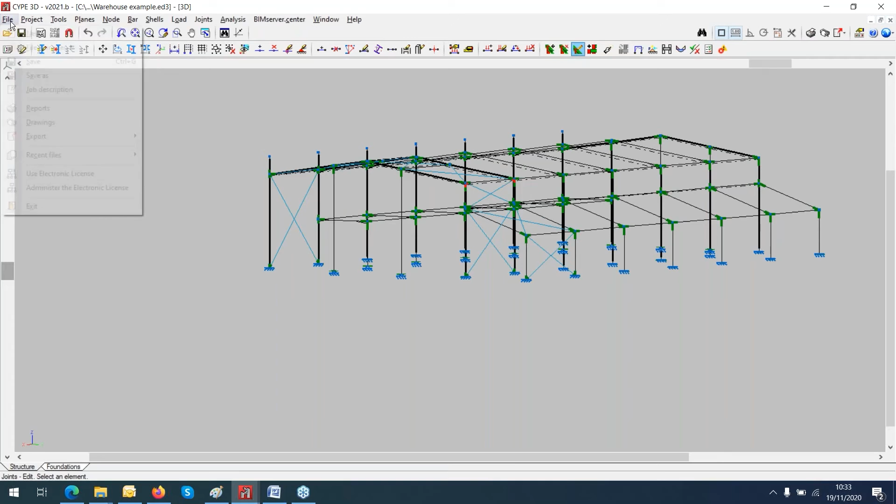Okay, what else? So this is it for this part, and now suppose you have this job and you want to do it with the portal frame generator, right? So what we need is just the basics. In the first example, this one. Oh, I forgot that one. Sorry. We go back to our example. What we need to know is basically the frontal one, the plane. The dimensions. We need to know these conditions accurately, the side, the length, everything, and forget about the rest of the structure because we need just the first frame, right?

So now I'm going to work with the portal frame generator. We go for a new one. Sorry, I'm going to close this, because I opened several projects. I'm going to close all of them, right? Just to get one. Now I have one. Go for the structure ones. Portal frame generator. Okay, we go for a new one. We're going for dual pitch.

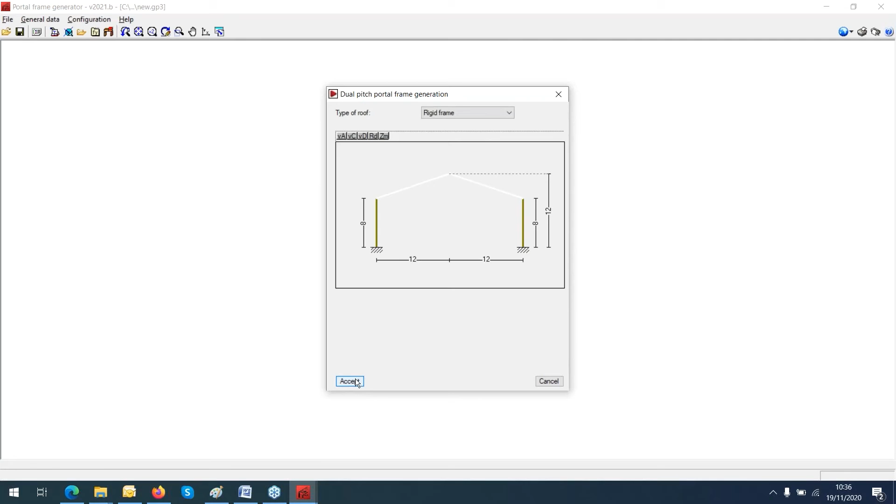Okay, I'll go for the rigid one. This is an example, I'm not trying to do the previous one. But you can change it. Your sections, 12 by 12, whatever section you have, you can do it. If you click in the center, you go back to the frame, and you can delete it. You can also generate an equal frame, just one or two. Remember, just only one. I don't want that, so I can remove this. You can delete the frame.

I can introduce one on the side. You click on the right side. I'm going to do the new frame, mono pitch. If it's 8, I'm going to maybe go for 7. Sorry, 7 on this side, and the other one could be 6 or 5, and maybe here 5.

And well, I'm gonna change this for 6 to be more consistent. So we have it here. Then you can click here and you can move the frame symmetrically to the other side. You can snap the frame to the other side, and so on and so on. Okay.

So I'm going to continue with that. So then I will generate the project according to the program. The number of spans is going to be 5 by default, and the distance between frames is going to be 5. I'm going to go for with roof covering, which is the usual. The weights over here, remember we are working with these units, kilograms. I'm going to go for 30. About the external panel light load, well, it's 30, that's okay.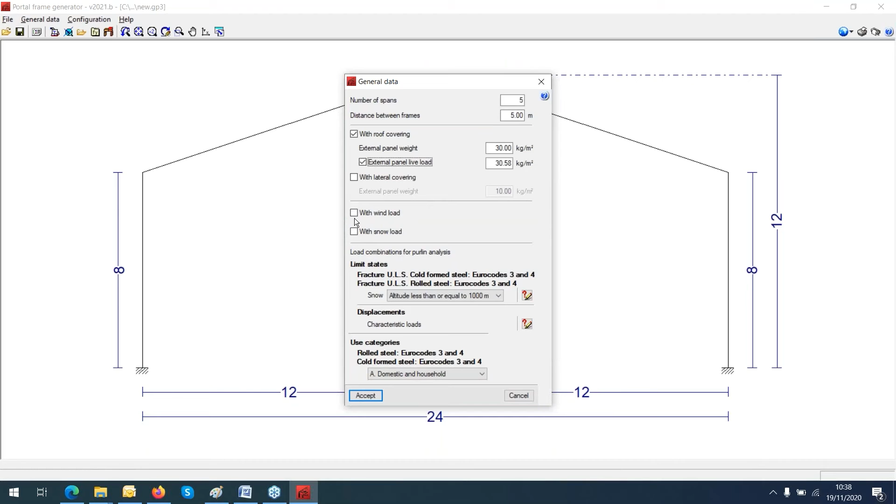With lateral covering, I'm not going to use the lateral covering. That means that one, the side rails. I'm not going to do that. But wind, I'm going to do it with wind load. With wind load, well, we don't have something in Indonesia, Malaysia. Well, maybe later, but we don't have that here. Maybe India. No, we don't have that.

Well, suppose you are working in India. If you have this information, you can also send it to us. I will introduce your wind code here. This is India. This is the basic wind speed. We go for the place. You can select the city, the structure class. This is the opening.

You can use American code for wind, Diego. Over there? Okay, good. Let me show for the Americans. Right. Oh, good, because by direction I can show you better, this is the best example of why we have positive and negative wind conditions. Thank you, Vincent. Suppose you have a wind condition hitting this side of the warehouse. So we displace this wind with 5% eccentricity. That's why we have positive and negative.

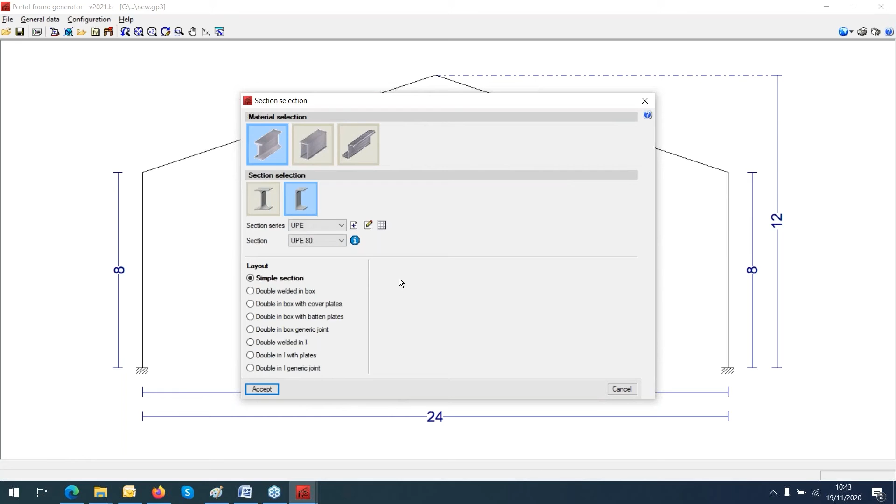And now the same section about the purlin descriptions. You have the type selection, separation and the steel type. The steel type, I think I'm gonna keep it. I don't know exactly what your needs are, but we go for the type selection. In type selection, we can maybe work with these properties, but I'm going to increase a little bit because maybe it's gonna be very small. It could be a single one or a double one. I go for double one, accept it, and I do the first design.

Clicking this button, the program is going to work with all the library that we have, and then it's gonna give you a solution. This solution is within the limit, so we can go for it. Accept it. Now it's here. The next section is the separation. You can do 1 point, maybe less, maybe 0.85. Now you click design. What the software is going to do is keep these types of profiles and select the best option, the optimal separation between the purlins.

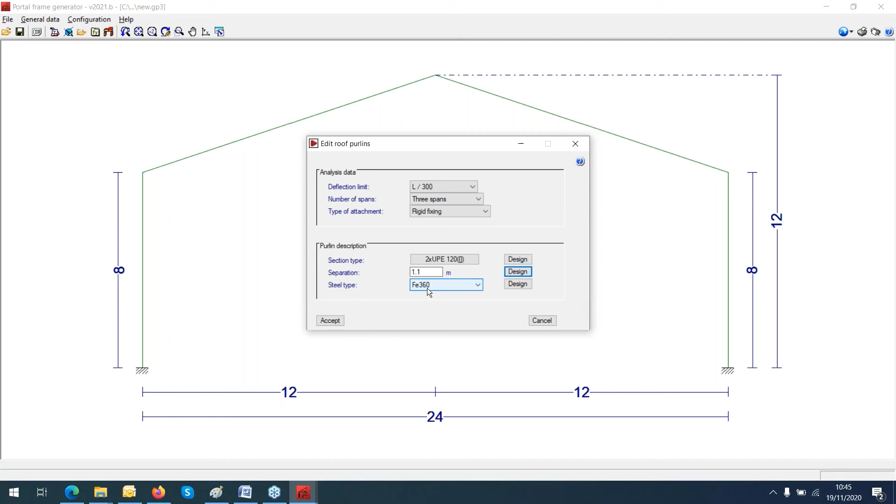The design is accepted. Now the software is working, and it gives you that the optimal separation is 1.10 and has been found. So accept that. And if it's not the right solution, perhaps because you already have in mind maybe 1 meter, it doesn't matter. Put it at one meter, and we are safe because you are around the limit. Accept that.

And now the program gives you these checks, and this is a proof that you must keep separately because you have to support your analysis, and this is something really important to keep somewhere. And accept it. You have now here the separation between them. If something happened and you used the wrong profile, you can redo it. This is an iterative process. You can do it again and again until you match what you need.

I'm going to view all the load cases. I can display here that we have all these pressures and suctions. I'm going to view all of them. I remember that I chose to work just on the roof. Accept it. Look, this is what you are saving. It's a lot of work. Now we go back to the management of the section library just to show you all the profiles that we have. Okay.

And now we continue. Well, I'm not going to use that to export this. In order to export, I give you the last check of your purlins. In this last window, we must set the configurations. I go for the fixed frame, and the buckling options. The most important one is these two, but the buckling is non-sway frame.

Well, once we are doing the analysis by hand, you must define which conditions there are going to be. We respect this condition only in this direction. If you see my cursor, we follow this direction because the program knows that there are some restrictions on this side of the warehouse, but on the other side, in this area inside, it is not guaranteed.

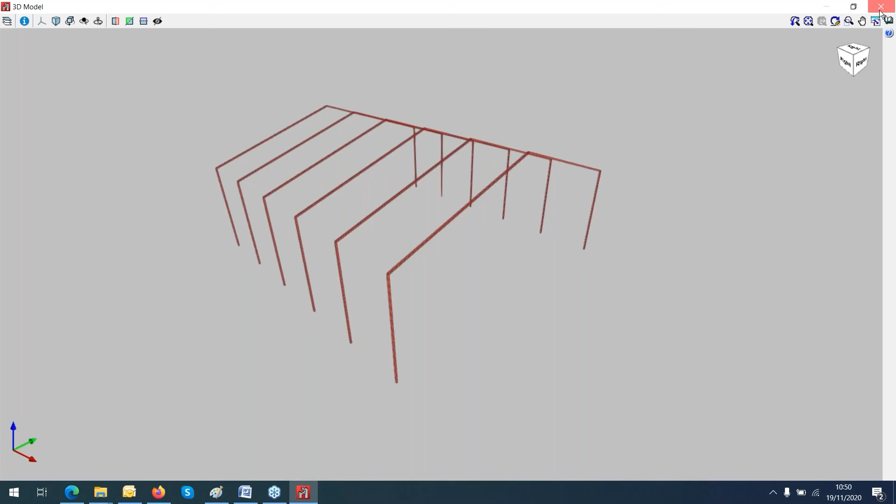The first thing is to view. You see a different color, just small bars in red. That means that we have no bar selection up to now. So we have to start working little by little until we finish the warehouse. But what I want to show you is the load cases, the visible load cases. Look, all these are inside. I'm going to view it over here. It's a mess. And then we can go back to the program also.

It created by default the panels, and also you can see the surface load. So if I'm going to edit or view all the loads on panels, you have panels on top, because remember I told the program just to check the roof. If I'm going to check the entire structure like an open warehouse, I will choose the other options, and it will give you the entire panels around the warehouse.

So you click on one of them, right click, you will see the dead load, the live load, and also if you want to create a new one. Look, everything is here automatically. You don't have to introduce the conditions here. By default, the programs are working inside. If you need something extra, like an extra dead load or live load, you can do it. But all these are already done inside the software. Okay, so accept that. Now we just start moving ahead, looking for the best profile. We already did it in the previous examples.

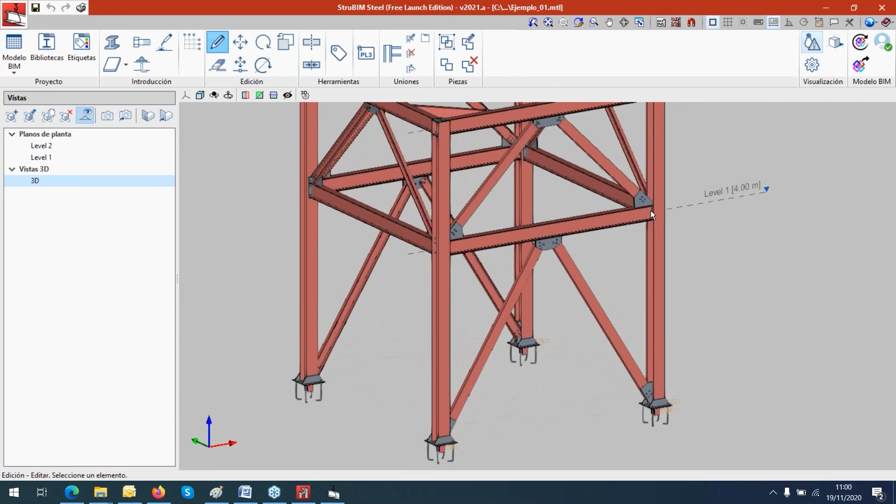Yeah, this is the department that is growing very fast right now. It is the most important one. They are looking for the best solutions. I think the beauty of this software is that you can get a file that could be sent to the fabricator. Well, later on, you will get more joint solutions. Could be any solutions. It's difficult to do this. They're working very hard to get it.

And as I told you, you can find solutions inside 3D about the joints. If you don't have it because we have some restrictions inside CAD, you can move on to CYPE 3D. Once you cannot find the solution inside 3D, you can go to CYPE Connect. If you don't have that solution in CYPE Connect, you can come here. Finally, for sure, you will get a solution. It's pretty cool. I'm learning to work with this software, but it's pretty cool.

Maybe you can show Diego how to change the elements in the joint, or well, no, not yet. Yeah, this is different. Look. Yeah, if you click in the plate, it will let you modify it, I think. Let me check. It's really hard to touch it now. Okay, look. This is the plate. You can work in the plate. You can generate the polygonal, the materials. You can hold the modifications.

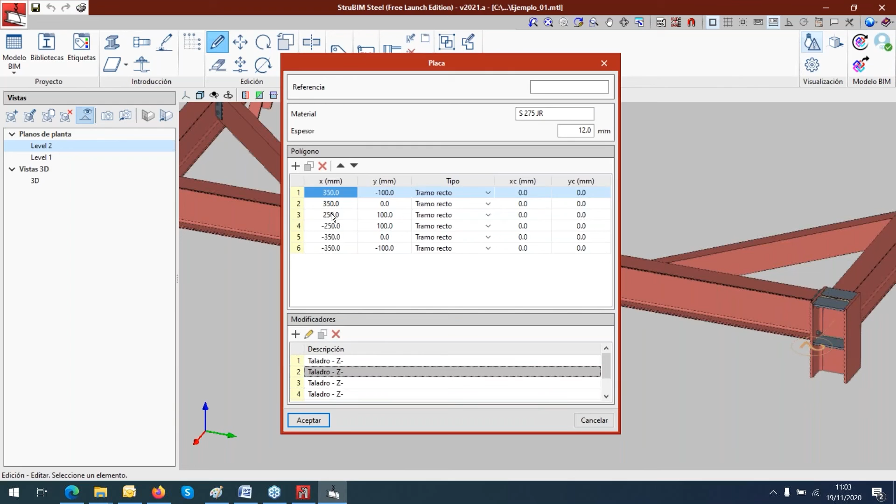Well, I will show you a list maybe next time. Are there any other examples? Anyway, I think people understood the idea, no? Maybe in another session we can focus on this. Well, the idea is you do the design in CYPE 3D and then you import it here and you do the detailing. Some people are asking questions. Diego, do you want to ask, or go ahead. No, go ahead. Okay.

Okay. Some people are asking about the seismic options because in Indonesia it is a must. Can you tell us something about that? Okay, good. Well, we are doing it. I'm going to this place. Maybe I'm going to help you with this program. 1 second. For the dynamic options, we introduce this normative. You are following the Americans or? No, we don't have it here. Well, could be American. No, Malaysia. We have Malaysia here, right? We are applying the Eurocode 8.

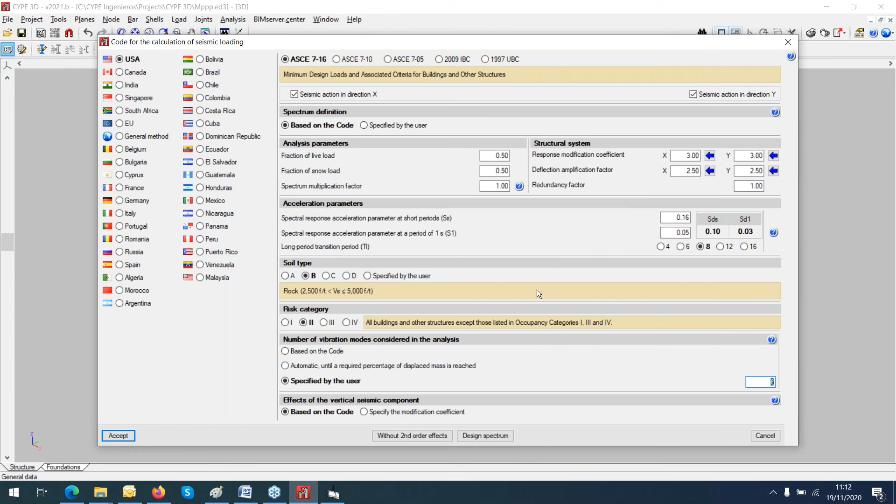The last one is the effect of the vertical seismic components. We follow the American normative. I have a special document for that as well. As I told you, I will give this information to Vincent, and he will translate it in our department so it could be available for you. But we follow what is in the American code for the vertical load. What else can I tell you about this? Yeah, I think this is it.

Did you finish, Diego? Are there some other questions? No, I forgot to tell you about the structural system, the response modification coefficients, and the deflection amplification factors. These values are something the engineer has to know according to the normative. You must find that in the code and introduce it here - it's not automatic.

About the redundancy factor, we introduce this number as 1. You are safe if you follow this, but it's the user who has to make the right selection according to this redundancy factor. I know that internally there is a department who takes care of this, and they are working ahead, looking to do it automatically. I know there are some normatives, like the American ones and also in South America, where the seismic effect is very important. The redundancy factor is important to develop inside the software, but not all cases are available.

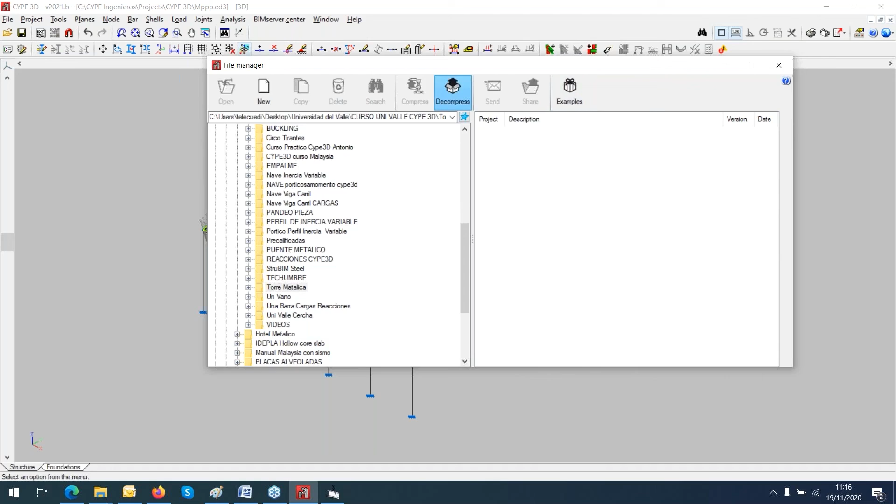Yeah, good, listen, okay, let me check. Let me look for one of those. Give me one second. I think for the demo of importing from CAD, that can be done in the next webinar. Yeah, why not? But I have here... the thing is... that one... I found it. Don't panic, okay?

Good, look, this is the 3D. They did this example inside AutoCAD 3D. You know, trying to do this directly in our software is really a pain in the neck. But once it's here, you can start working very fast. You can do anything you want, anything you need. Your only limitation is your imagination. That's the only limitation in this software. The limit is your imagination, but it's possible.

You have another question? Do you? Vincent, any other further questions? Vincent is not here anymore. Alright, probably he is offline.